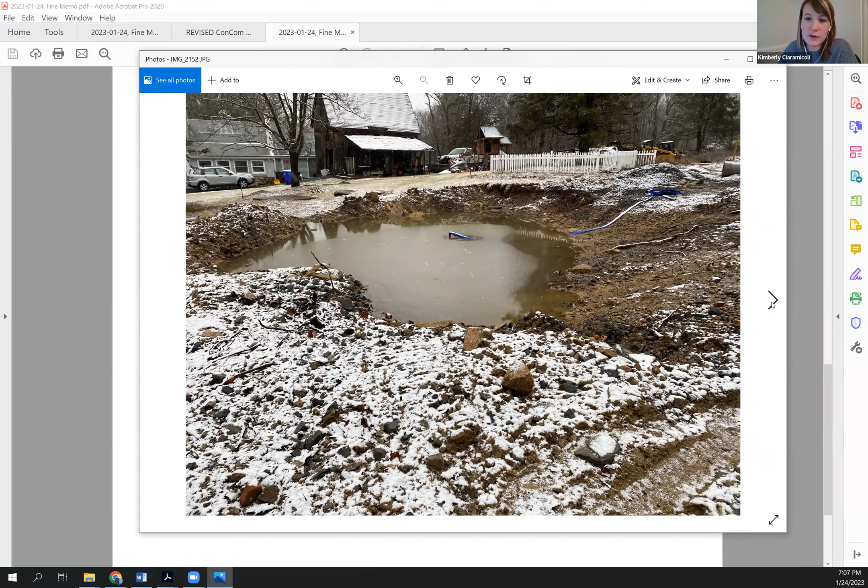This is, I believe, a 9-unit subdivision in the north part of town. I had gone out on December 29th, I believe it was, and they had a blowout in their erosion controls, and sedimentation had washed out into the riverfront to the Sudbury River and the adjacent BVW. Anna and I have been out a number of subsequent instances since that point. The developer, I believe, is on the line tonight, so he's taken a number of steps to control some of the runoff at the site, including rough grading the 2 main detention areas.

And these are some of the photos from the last time that Anna was out. So they've made a number of strides at the site with temporary BMPs, but there's still stormwater that's kind of actively flowing off of the site. The turbidity looks to be okay, you can kind of see it there. So we're making a lot of strides, but a lot of the site still remains unsecured, unstabilized.

And the commission, the last time we spoke, had decided to kind of table the conversation to see how the site did in the last storm, in the upcoming storm. And I would report that it mostly held, but I would love to see additional work. I think it's an ongoing process. Right, okay, thank you, Kim.

Do we have the developer on site or on the call? Yep, I'm here, Shane Perrault from Turkey Ridge Estates. How are you doing, Mr. Perrault? Good, how are you doing? Good, thank you. Can you kind of give us an update as to where you are, what work's going to be conducted in the coming days, and where we are in regard to the installation of the permanent stormwater controls at the site?

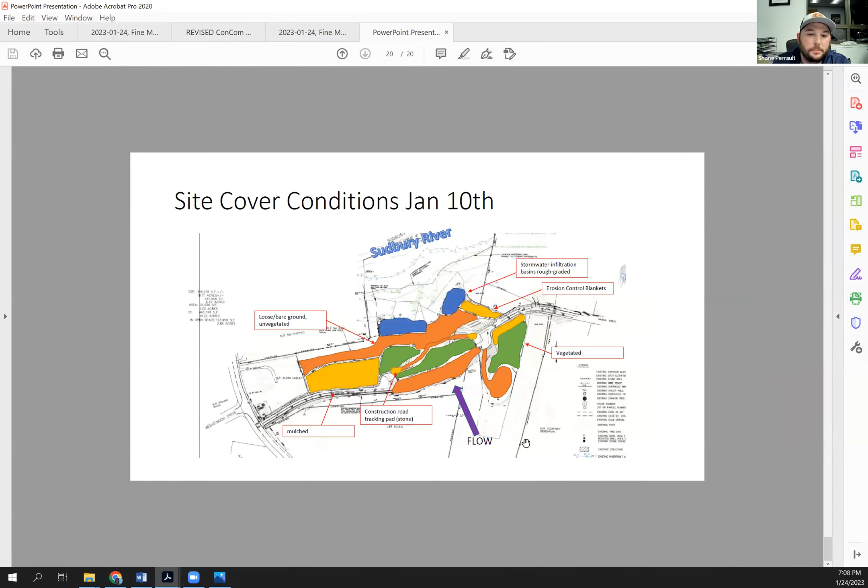Yep, so basically, since the last meeting, and since the breach, we've made it pretty much our sole plan to make sure that doesn't happen again. We went over in the last meeting all the different measures we made at the site, for soil stabilization and erosion control management in the 6 days that we had from the breach.

Since the last couple of weeks, since our meeting 2 weeks ago, we've continued basically trying to manage all the water that's there and prep for pond construction. I know Kim had some issues with some of the roads being unstabilized throughout the construction site. We had riprap delivered, and we installed riprap stone all throughout those construction areas so we could minimize any water runoff or tracking of mud up and down the hill.

We edited the holding basin that we had. We created some emergency spillways in case those got too full, so water could be mitigated and spill into other holding areas. We created more riprap, basically check dams uphill, and we've constantly been working as much as we can to mitigate that water.

And we've implemented, as we discussed last meeting, an internal inspection program. We walk the site along the erosion control line every day, in the morning and in the afternoon. We've been monitoring the weather, and since two weeks ago, it's rained or snowed about 12 of the 14 days.

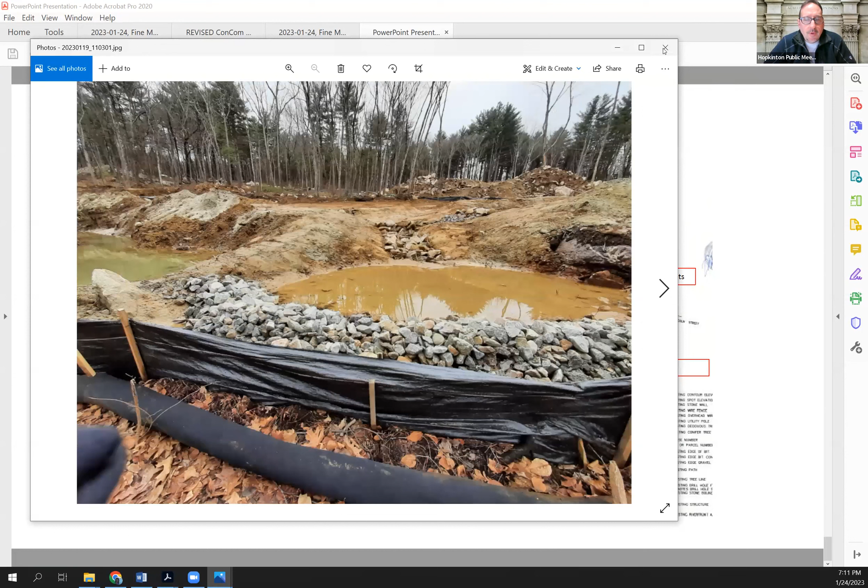Okay, what's the schedule on the permanent basins? When are those going to be started? How long do you anticipate it taking?

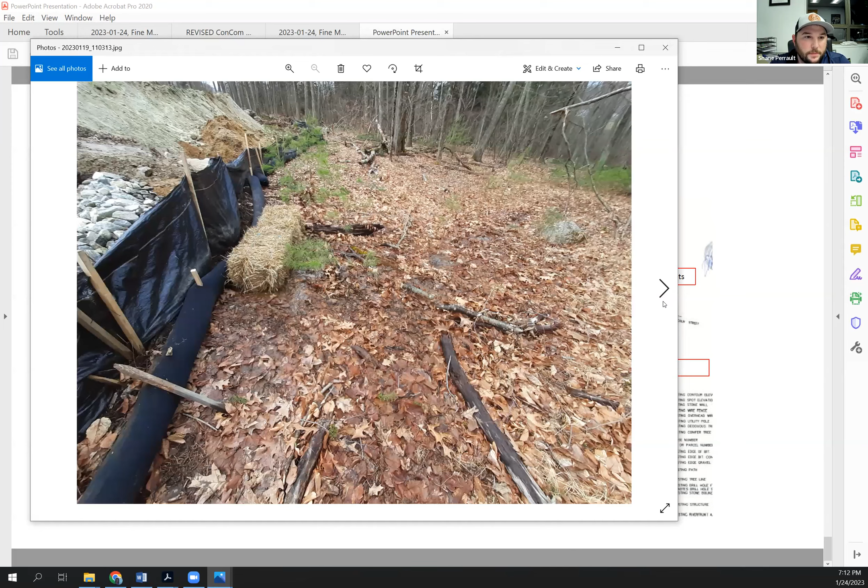Over the last couple of weeks, we started bringing in some material, fill material for the sub base, but we had to build a road to get in and out of the subdivision and the pond area so that we wouldn't track mud up and down, and also to help mitigate some of the water runoff and slow and clean the water almost as a check dam.

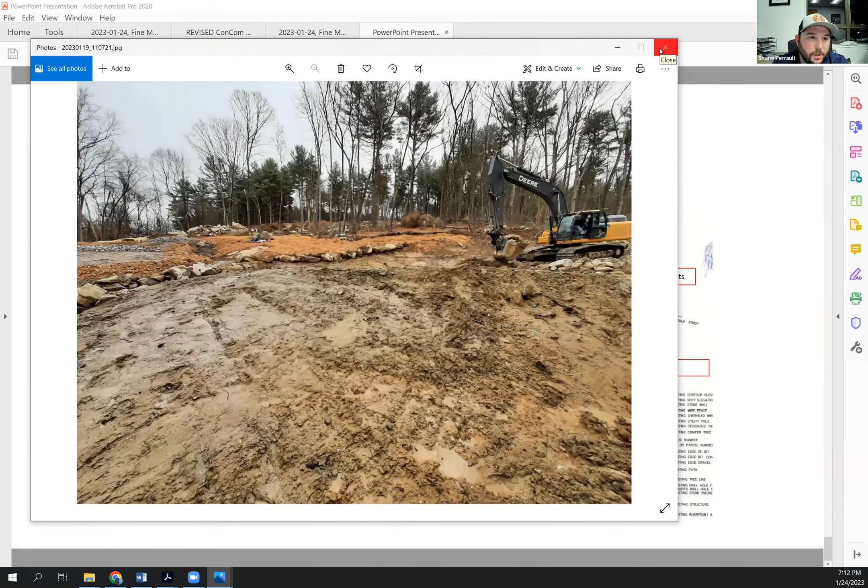So we've been starting to basically fill the ponds to sub base, and we have retaining walls along the backside. On Monday, we have our retaining wall contractor coming back to start all the retaining walls on the backside. Today and throughout the rest of the week, we're prepping all those areas so we can construct those retaining walls, which will essentially hold up the back ends of the basins. I'm sure you've seen the plans, but basically the back of the basins are right up against the erosion control barrier, so those walls are actually what's supporting it. So again, we're starting that on Monday.

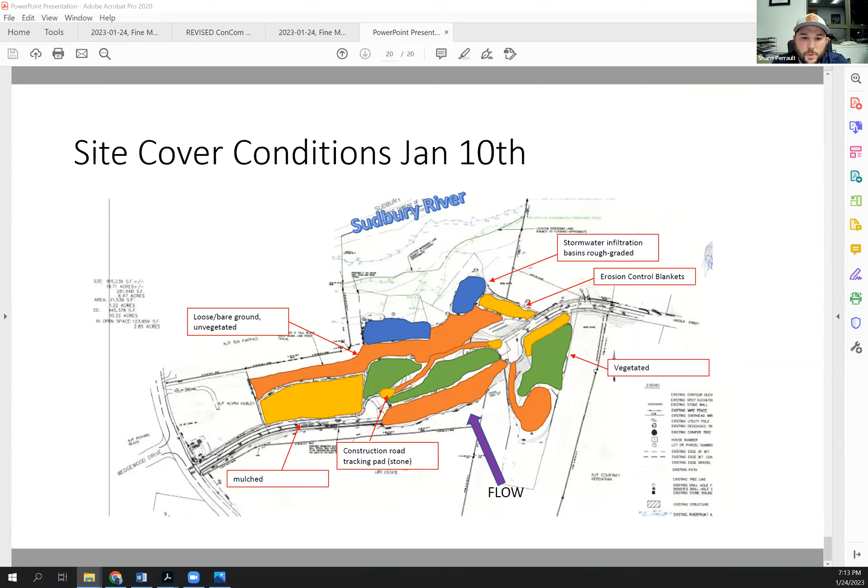Until then, we're doing all the prep work. When we talked about it a couple weeks ago, we figured four to six weeks, and we're still on that timeline. We might have lost a week with the weather over the last couple of weeks, but within the next four to six weeks we should have this whole thing built and ready to go. Our plan is to, once the weather breaks in the spring, roll into house construction. So our schedule is pretty imminent that we're going to have this full infrastructure built by the middle of March for sure.

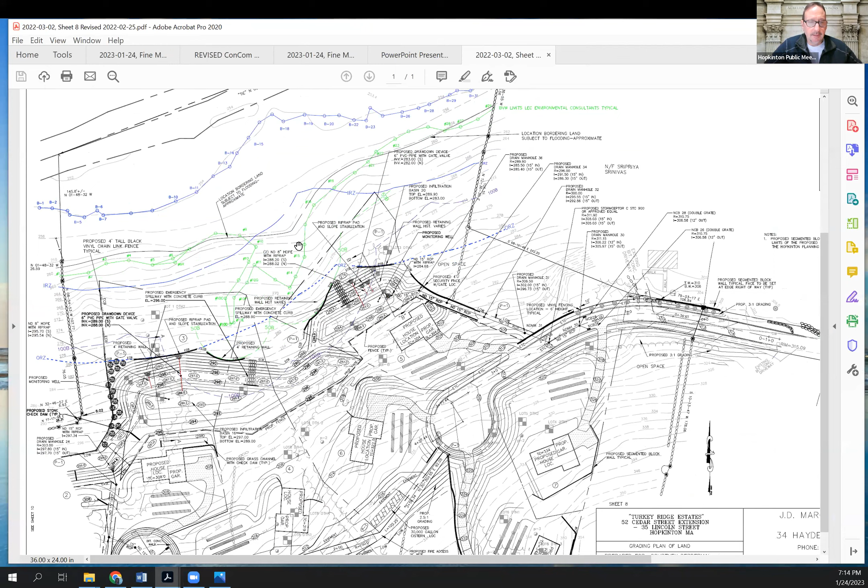Okay, yeah, so to Kim's point, the temporary basins that are there appear to be almost at capacity, 70 or 80% in the photos. We had rain the past couple days, we have more rain on the way tomorrow and into Thursday, and then we have spring coming, which typically brings a lot of rain as well.

So I understand that the water coming off the site now is clear, which is a good thing. There shouldn't be any water running off the site at all, but the fact that it's clear is good. So just keep in mind, as you're planning the schedule, that we anticipate there's going to be more rain, and we just don't want to see any more issues at the site.

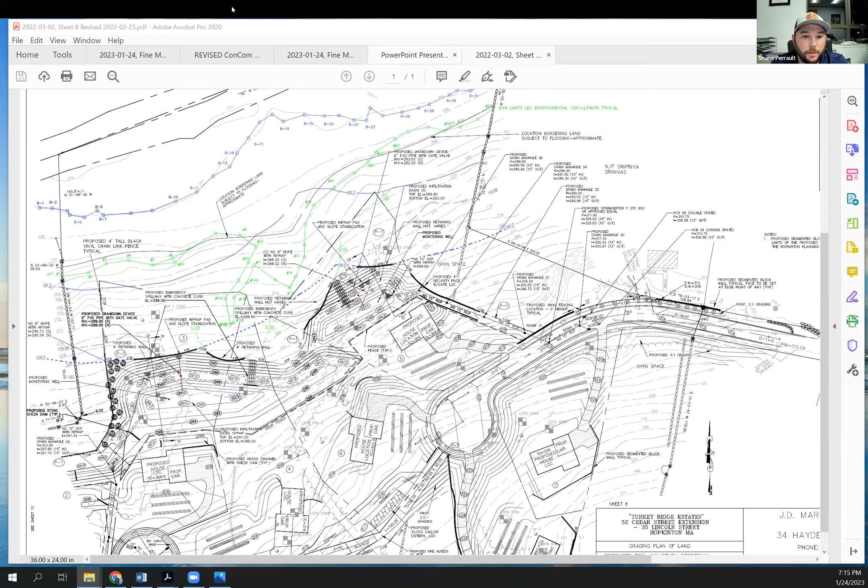Shane, I was just wondering, you had stated that Goddard was going to prepare a restoration plan for the impacted area. I was just wondering when we can anticipate that. Yep, I forgot to mention that we also want to do every measure we can here.

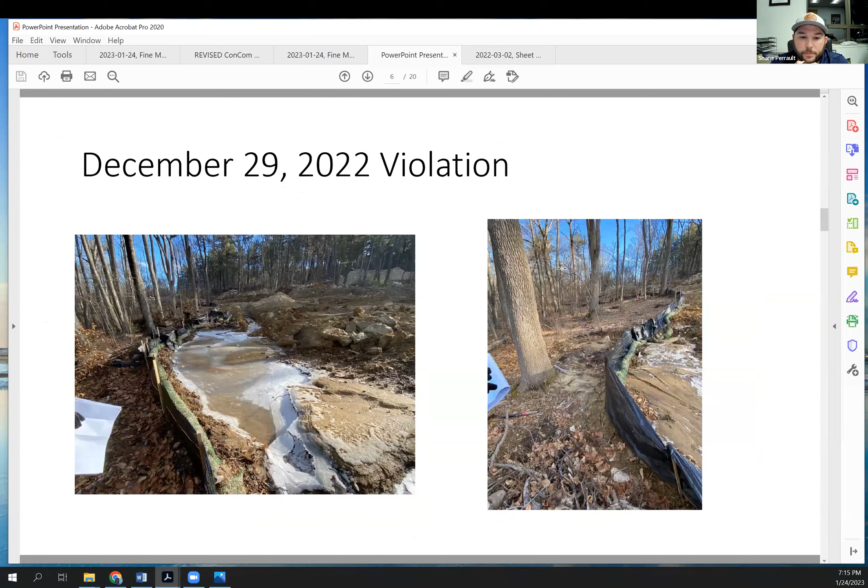We hired Goddard to be our consultant for the construction and maintenance of the erosion controls, and they're also preparing a mitigation plan and will be doing monitoring of the removal. Andrew, I believe, is on the call. Andrew, do you want to fill them in on where we stand? I know the snow hasn't helped us with the monitoring the last couple weeks, but give them an update?

Yeah, absolutely, happy to jump on. I had called into the last meeting as well, once we were brought onto the project to start talking about this. As of now, Goddard is officially on the project. We are moving forward now.

So that plan is coming. I will have that done within a week maximum. I plan to get that to Kim prior to the next meeting so she can review, comment, and we can approve something to get this moving.

So up next for Goddard, we were going to be visiting the site at the beginning of this week, but the snow pushed us back. We plan to go out there and measure the depths of the sediment plumes to provide an area-specific removal plan.

Typically for these areas, it's done by hand only, and we assess based on the depth of the sediment whether removing just the thinnest layer would be beneficial. As far as disturbance, anything we deem a quarter of an inch or more has to be removed due to the impacts it could cause to revegetation of the ground cover in the spring.

So the way Goddard's looking at this now, the area appears to be stabilized. We know where the plume is. As soon as the area is exposed enough for us to get out there and measure, we're going to have a plan specific to that area.

So in our opinion, I think everything is under control. The applicants are making a lot of strides on the site and continuing to do so, and we're right there with them. I saw the fines that were drafted up today, and I would ask the commission to consider the progress that has been made so far, with the understanding that the plan will be coming within a week to review.

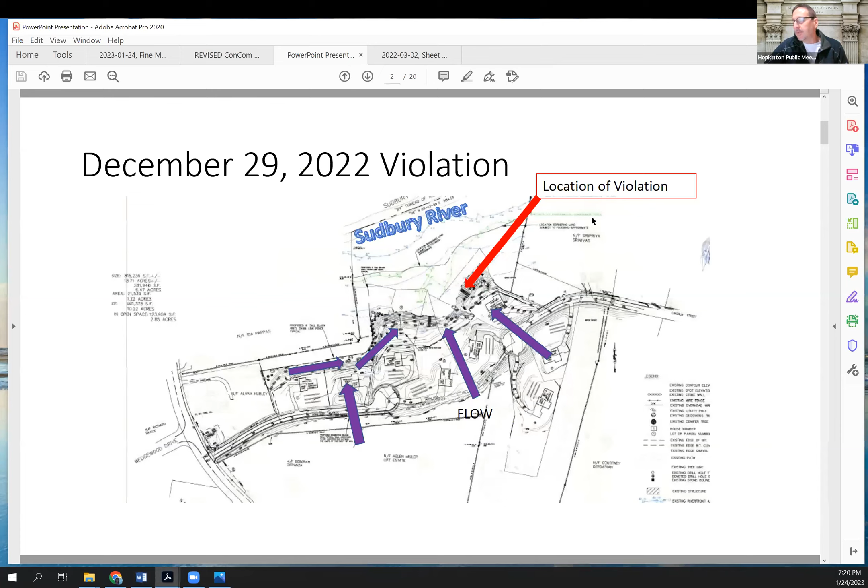This is an RDA, request for determination of applicability for a septic system at 4 Curtis Road. The Hopkinton Conservation Commission will hold a public hearing on Tuesday, January 24th, 2023 at 7:00 PM virtually online to hear all persons interested in the request for determination of applicability filed by Edward Daly to construct a replacement septic system with associated site work. The location is 4 Curtis Road, Assessors Map U13, Block 35, Lot 0.

Okay, do we have someone on the line for the applicant? Dan McIntyre, representing Ed Daly. Good evening, Mr. McIntyre. Good evening.

Mr. Daly is in the process of readying his home for sale, and he needed to replace his septic system. We were retained to design a new one.

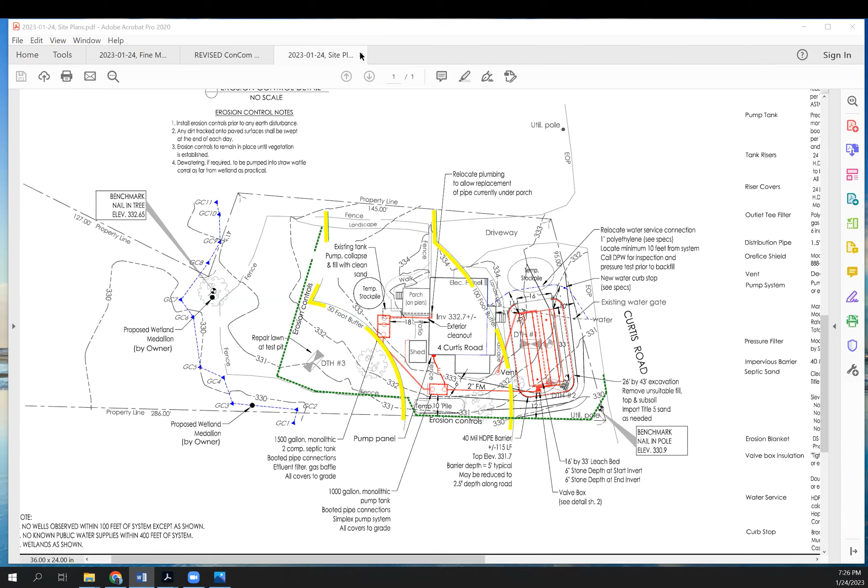Okay, moving along to continued hearing, 7 Whalen Road. This is a continuation of a notice of intent, and it's Mr. Prasad.

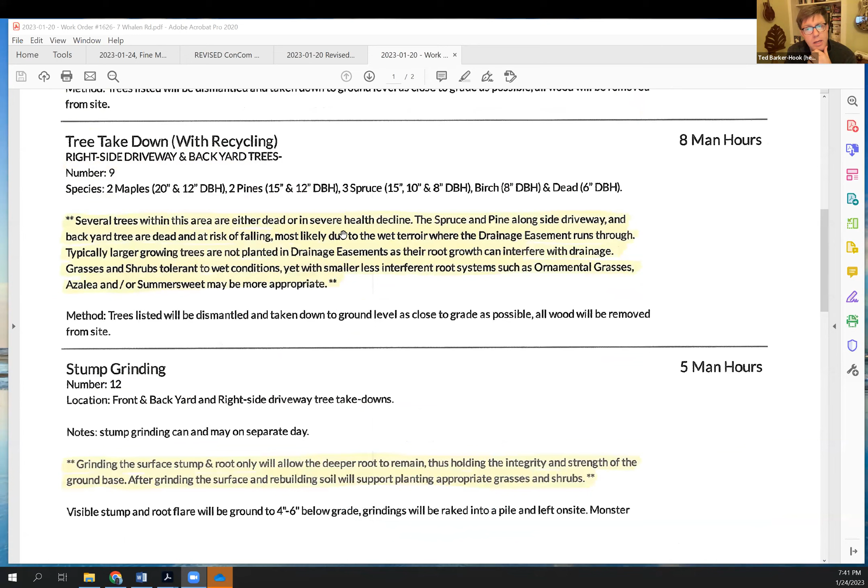Okay, I think, Chair, sorry Kim, to interrupt, did you have something else? No, I had a quick question for Kim. Is it typical that our arborist's opinion is the same as the person who then profits by cutting down trees? No, I'm not aware of an arborist in town. Excuse me, I'm not aware of a tree company in town that has an on-staff arborist at this point.

This is an issue that's come up on a different site that we're going to see in a few weeks. So if this service does have an arborist, it will be the first one I'm aware of. But it strikes me as a conflict of interest to provide honest assessments of tree health if you make more money if you can say this tree is not healthy and needs to come down. Yeah, I mean, they do have their certification that they're required to keep up with, and they certify a certain ethics code.

I'm not sure if there's anything else we can do, how far we can go, you know what I mean. We typically don't accept just quotes, if that does make you feel any better. I think the one thing I'm just seeing here, the numbers, it says several trees are either dead, but I don't see a number or specifically which trees, which I think is important if we're applying our typical healthy tree gets replanted standard.

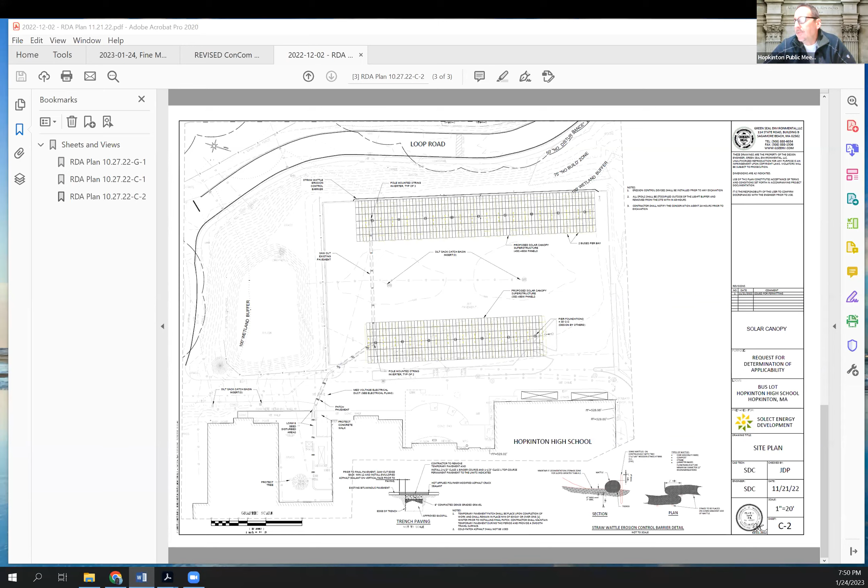Moving right along, we're making good progress. Mass laborers training - there are three hearings: the notice of intent continued for the pond, the notice of intent continued for the Clinton Street right of way, and the notice of intent for the gas line - actually there's four hearings, excuse me - and then there's a notice of intent for the fire suppression line. Do we have the applicant on the call? Good evening, Mr. Connors. Good evening. You want to give us an overview of where we are today? Sure, can I share screen? Yes, you may.

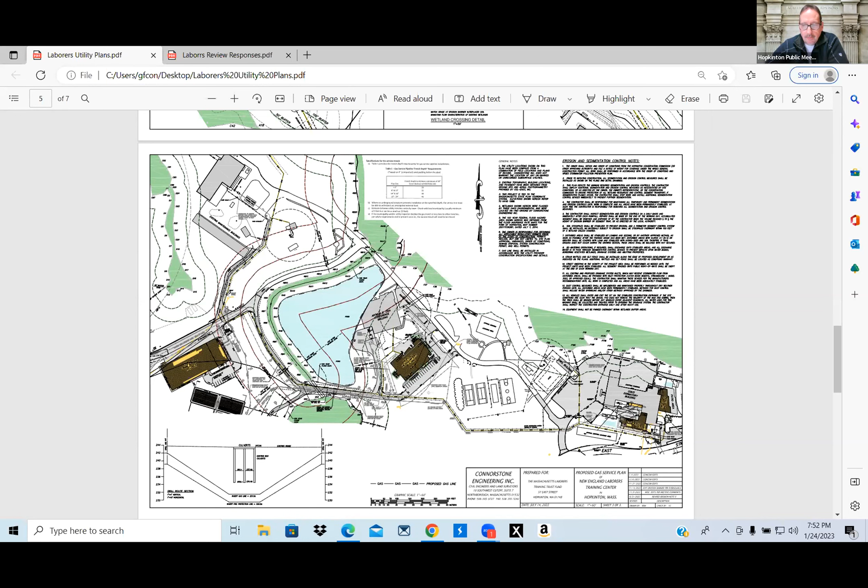Where am I? I'm trying to find it. All right, I'd like to start. I'm not able to move that. You hear me? Yeah, you should have control over it. Not able to move it. I think that's an issue on your end, Mr. Connors. Hey, mouse is moving. Point oh, up, here we go. I gotta move this, and put that. All right.

Getting into the campus proper, which is what I call where the buildings are currently being built—areas that have been disturbed, or are currently part of the campus and not natural wooded areas—I call that the campus proper. Then we have an area from the Maloney building, up on the hill, going back through this rear section of the property, which is the undeveloped portion of the property.

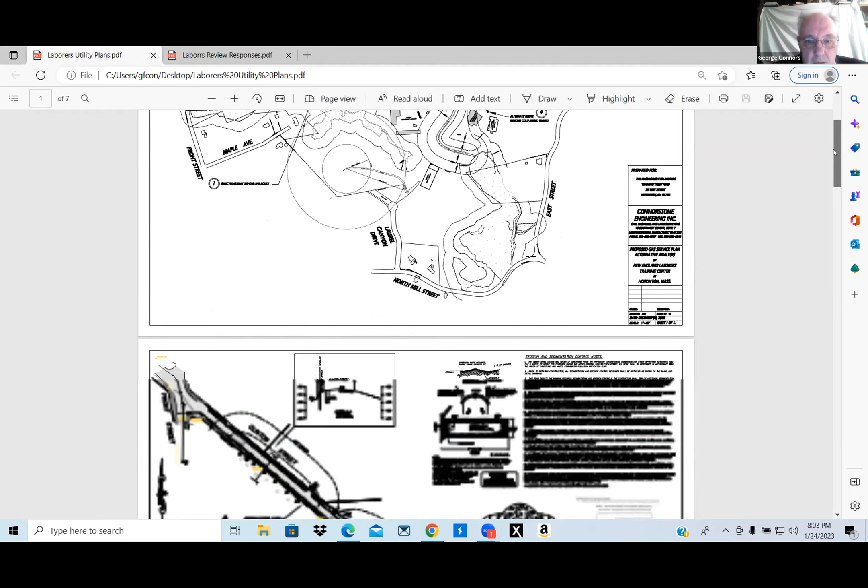I'd like to go to some other drawings now, but I want to stay on this for one more minute. Your first listed hearing is a pond over here that we talked about dredging. We filed a notice of intent for that about 1.5 years ago and we've been holding that in abeyance. The fire department required us to dredge that as an additional source of water.

It was a fire pond, had been a fire pond for many years. It's not very deep, kind of poor water quality, geese and things there. We've demonstrated that there are fish in it, it's not a vernal pool. We've done soils analysis and depth analysis this past winter, a year ago, and determined that its volume is very, very small. It's probably not the best thing to pursue that notice of intent for dredging that pond, leaving it as it is.

We had a driveway coming in with the various draft lines for it a long time ago. This particular pond down here has been used as a fire pond and has draft lines on this end. So what we looked at, it's got millions of gallons of water, 15 feet deep in the middle. I've provided you with that mapping of the bottom of it. The fire department, we've talked with them and their fire consultant, to determine that this would be a much better source of water. It's very clean, clear water. It's been there for about 20, 30 years.

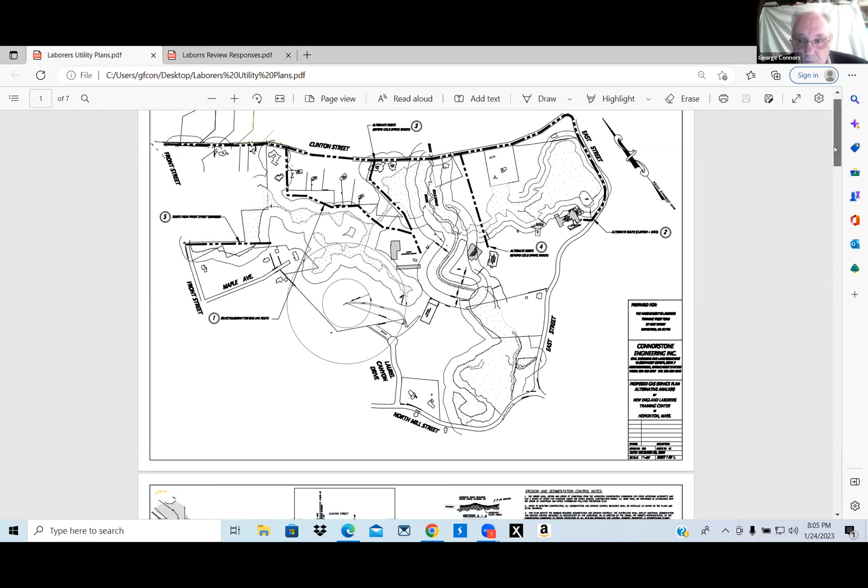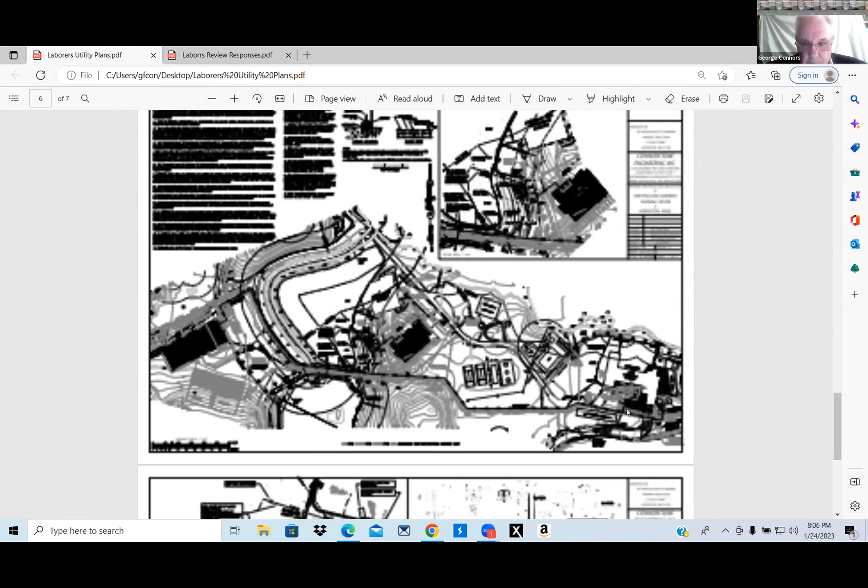I'd like to go to that diagram of the pond while we're on it. Is that refreshing? All right, there we go. Yeah, nice.

All right, so this is the new headquarters. Here's the new headquarters building, which you approved not too long ago. It's under construction, that's the Coia building at the pond. This is our pond, it's the deepest portion right there. We have a paved driveway apron that comes in here. There's been a generator in this location for years.

Our underground storage for oil for the fire. In this particular location we've chosen that for our new fire pump that would service the entire campus and East Street. We'll get to the drawing for that in a minute, but what I wanted to show you is these are our traveled ways that come around the site. This was our culvert, a double box culvert that we penetrated underneath with horizontal directional drilling. So that gas line and the water line, which will be in another drawing, will be in the same particular location. Again, it was fairly easy to accomplish at that time.

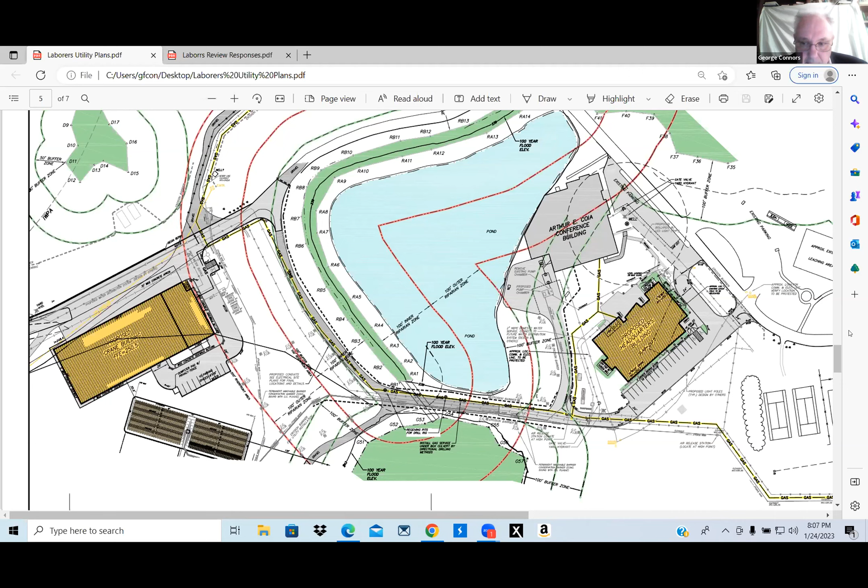Onto that actual pump station. So the fire suppression line will basically be co-located in the same trench area as the gas line in the campus proper area. Is that correct, Mr. Connors? That's correct, and there are 4 other pipelines under that culvert. One for electricity, one for telephone, one for our sewer system, which connects all the buildings into one particular location, and one for our new potable water supply for the entire campus.

So again, the Coia building, the pond is here. This is about a 20 by 30 foot pad with a small little building on top of it. It will have a very deep wet well into the ground where the pipe will enter into the pond in this particular location. And it will be a draft line that will be able to be operated automatically if a fire system requires it in the buildings.

Additionally, it will be available to pump water into the water line that goes out to the edge of East Street. It will also have, as another opportunity, a draft line coming in here from the edge in case the fire department simply wants to charge this line from their own pumper truck. Maybe there's a power failure, maybe something that doesn't operate there, so this is simply a backup that they want.

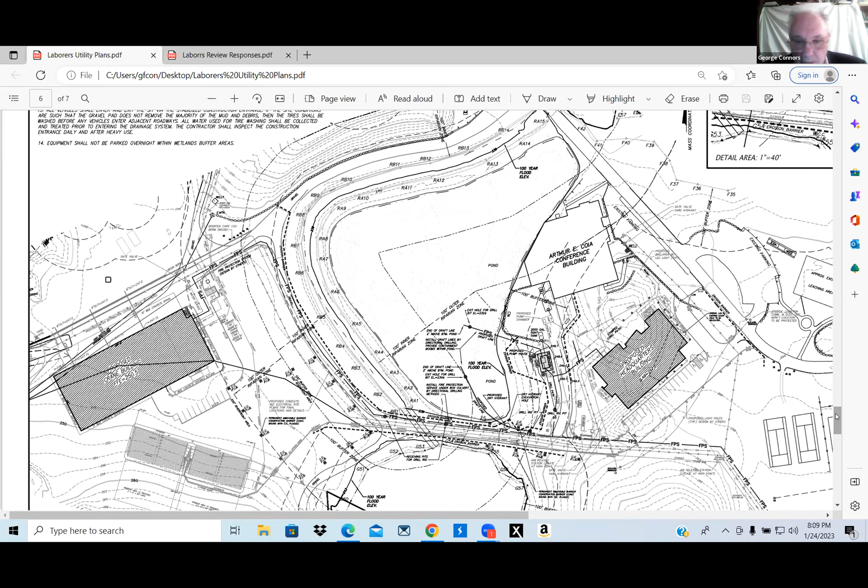In terms of the work in the campus proper, I think you've seen, actually Ted, I think Ted and I were the ones that walked the site back a year or so ago. All this work takes place in the campus proper, as I call it, in areas that have previously been disturbed. So that leaves us back to our gas line coming through the woods. As you know, there's one section that comes down Clinton Street. That starts at Front.

I'm going to reduce that. As Clinton Street, we have Front Street just up at the top of the plan.

But as we come down Clinton Street, we have a little bit of a wetland complex that's right along the edge of the street, and we have another one right along the edge of the street as well. And we get into where we go into the property.

Continuing here, this is where we go into the property—those little open depressions that were, I think, formerly houses or some kind of construction at the time, torn down. The laborers have acquired that property.

We've given you diagrams of the pipeline depth, which is about at the elevation of the water, the top of the wetlands at that location. And this particular section of road is almost dead level at elevation 202.

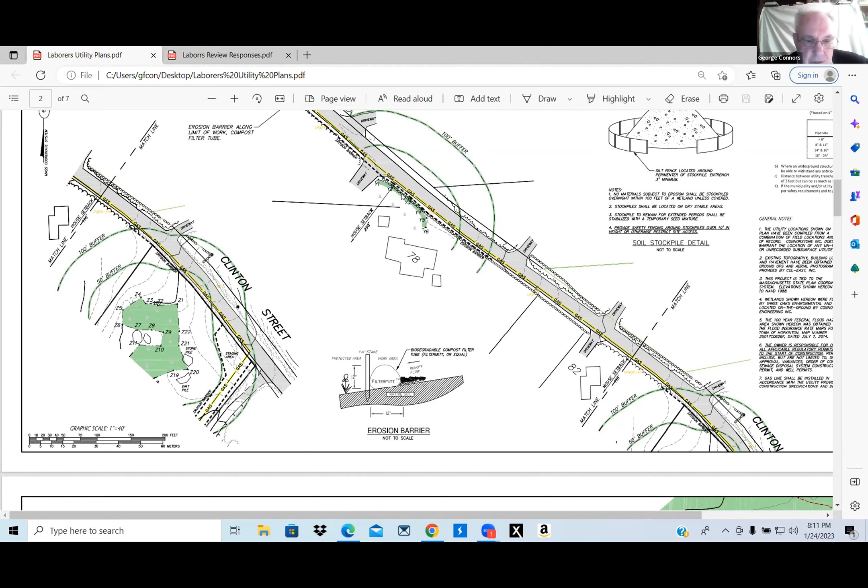We don't anticipate any dewatering of these little wetland complexes. We gave you some diagrams of the water line or the gas line as it comes into the property, past these two little depressions—I told you, some sort of houses or something like that at the time. That pipeline comes in along there.

It is well above the low portions of these. I don't think they hold water for a long enough period of time in the springtime. Nevertheless, we are above that.

And then we start talking about this particular gas pipeline that goes through the property. We made a little bit of a change in this location to bring it out further away from the corner. And then we come along here—you can see in green, these are the wetland complexes.

And then there's the 50 and 100-foot buffer. The majority of our work is in the 50 to 100-foot buffer as we come along, not really in the wetland complex at all, until we get down to this particular location at the bottom—I call it a ravine, a fairly small little area of wetland crossing.

It's an ephemeral ditch that comes through here. It does flow when it's heavy rain. I was out there not too long ago and it was dry. We think that's a kind of minimal crossing. We're happy to put a little swamp mat over it if that's a problem, but we believe that is the minimal impact we could have to an actual resource on the site.

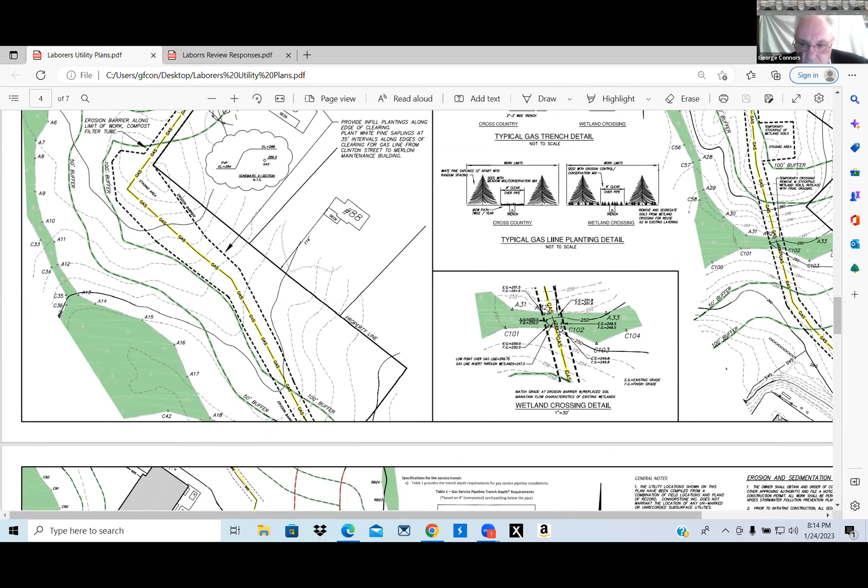This is a diagram of the actual gas line with various elevations. And as I said, that's the crossing, and that's the corner of the Merloni building there, which brings us into the campus proper—that shows up right here.

Now at this particular location, we're where they already have infrastructure and buildings and things of that nature. Right, that's all previously disturbed area.

So just so I'm clear—the continuation for the pond portion, 188-1741, we're tabling that particular filing pending the outcome of the other three, correct? Correct. Okay, all right, got it.

Okay, and then when was the habitat evaluation submitted? I think it was about 4 weeks ago.

Okay, and did that have the planting plan in it? It did—it had some small type, and Vito, yesterday I think, increased it in size. He increased it yesterday? Yeah, in response to a question or a comment.

It is, yes. That's kind of what I was thinking about, I just hadn't heard that specifically. I wanted to verify that. Whatever is campus proper, which is where the river comes through, is all disturbed, but also consisting of gravel or paved roads or drives.

Yes, if it's going through a gravel or paved drive, it would be able to be considered as an exempted activity. Correct. Although we've tabulated that in. Right. So then that was going to be another question as far as your tabulation, whether it includes all work within a riverfront area or only things that you feel are not exempted. Well, I feel that it's all exempted because of what we just talked about. Okay, I'm not sure I read your local code to say that.

It's a moot issue. I think that more or less covers my questions. All right, thank you, Joe.

Let me open it up to questions from commission members. Through the chair. Yes, George, could I have the screen back? Sure, please. Thank you. Good. Get it? Yep, we're working on it, but we should be able to get it. Thank you. Do you see it? Yes, okay, perfect.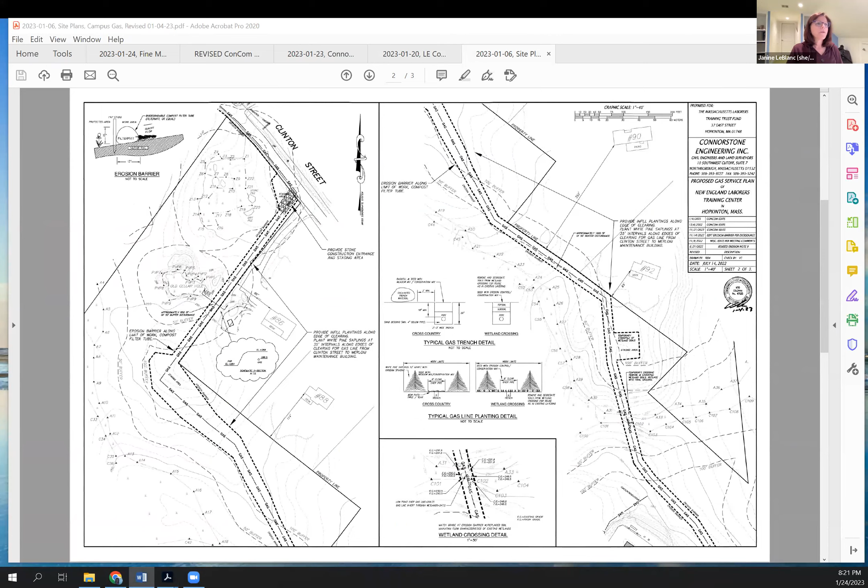So, questions, comments from commission members? Go ahead, Janine. Through the chair, regarding the alternatives analysis, my interpretation or reading of the alternatives analysis on alternate route 4: yes, it's a wider wetland crossing, but if you move over about half an inch to the left, the wetland crossing looks to be about half the width. And while it still is wider of a crossing than alternatives 1, the way I see it, it's a wider crossing in the campus proper that's already disturbed versus an undisturbed crossing in alternatives 1.

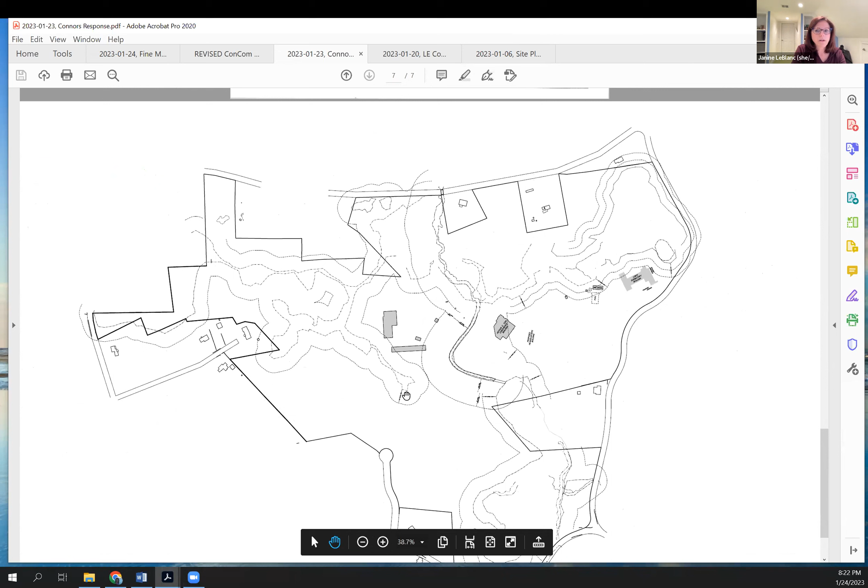Give me a second to look at it on my phone.

Okay, when we walked that site, there's actually a bit of an opening pathway along that line from Clinton Street in. Yeah, you follow that, like a cart path, Mr. Connors? Yeah, and it's pretty substantial. It's probably about 12 or 15 feet wide, and it brings you right to that particular location. And as the photographs that I gave you, which we took there, indicate, that area is where there would be literally no trees that would need to be cut across there.

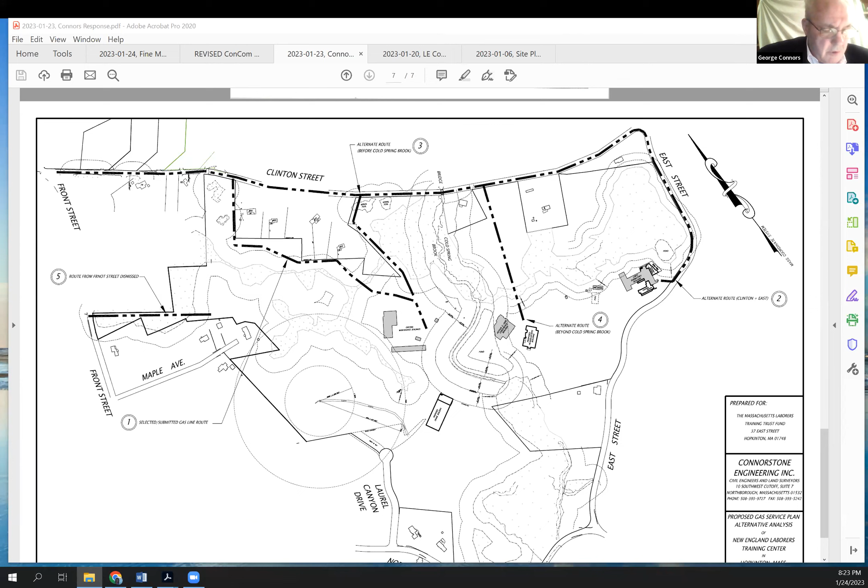Yeah, if you go a little bit to one side, then you do in fact have a little bit smaller of a crossing, but you're going to be doing a lot more ecological alterations. But is that considered sort of the campus proper that's already disturbed? No, not until you get to the other side of that wetland.

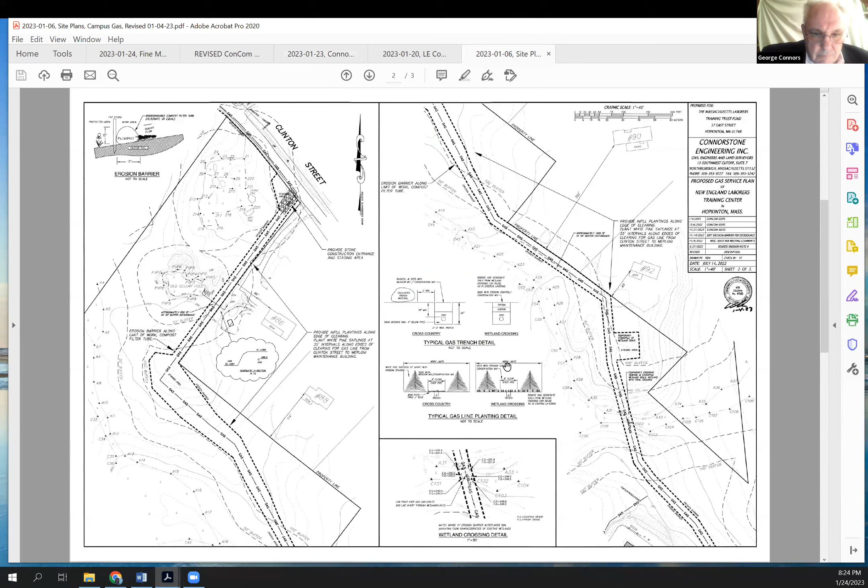Are you talking about this area, George? You see the headquarters building? Go right, start at the upper corner of that, and then simply go straight up the drawing. That's about where it is. There's a parking lot just across from there that you can see. You see the little island just opposite headquarters, and there's a parking lot behind that.

And then you see where the wetland line is, and then the first 50 feet. Somewhere between the 50 and the 100 is the edge of the parking lot. So that crossing is pretty close to pavement and buildings already, where it comes out to pavement and building.

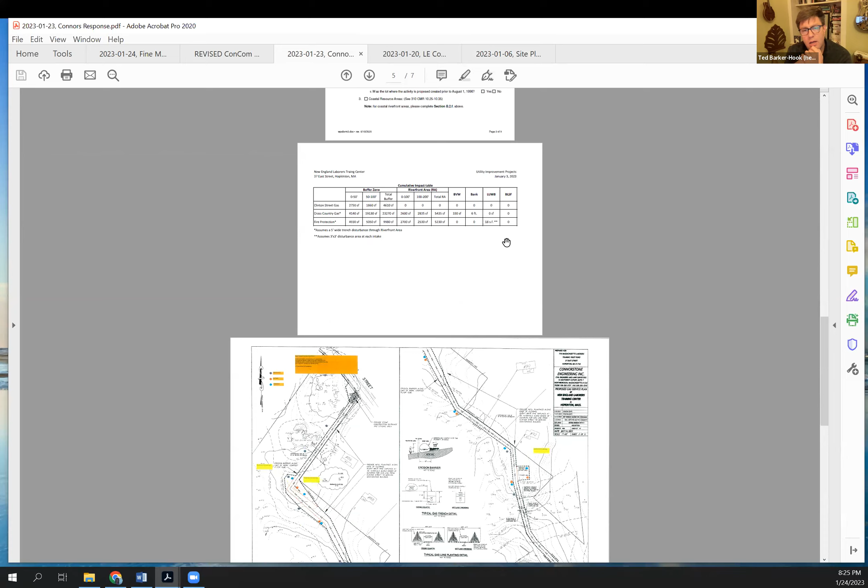Thank you. May I follow up on that same option 4, just so I have it clear? Are you saying, Mr. Connors, that there is a cart path of some kind from Clinton Street until you get to the water crossing? It's most of the way, about 2/3 of that way. So is that a route that has almost no tree removal? Oh, no, it's not quite wide enough. It's about 10 or 12 feet, so it's not quite wide enough.

Yeah, I had one other question before Janine asked hers, and I appreciated Janine's question. You mentioned if the pipe went all the way down Clinton, then down East, that there would be tree removal on East Street, and I think you used the word significant or something. Do you have a count roughly of how many trees would be removed along the edge of East Street? I think it was 9. There's an arborist report that was submitted. I think it identified either 9 or 11. I don't recall, it's about 2 months ago.

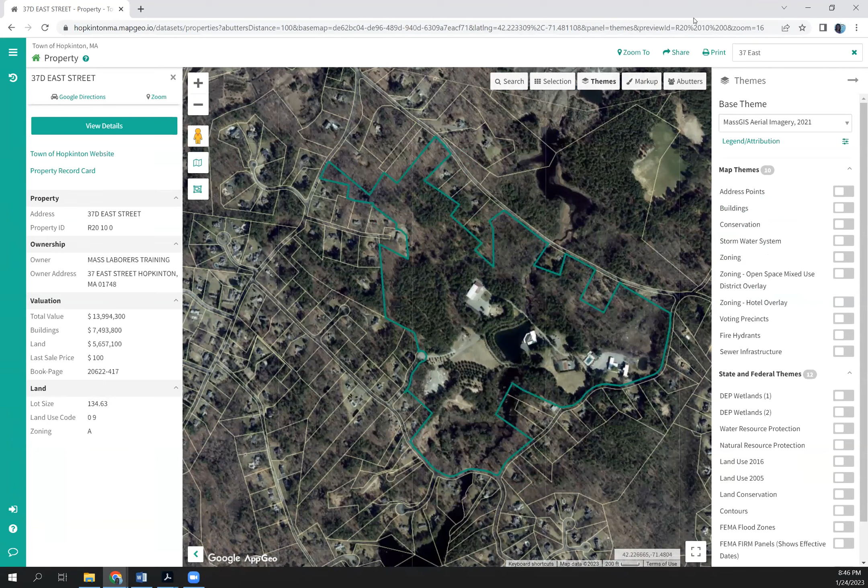Not a question, but a comment, since I didn't chime in before. I'm still very troubled by the proposed route. From a conservation standpoint, I think they should go up in the road to do this, not over there. I just can't justify it right now, because it would be minimal damage. The other thing, and this has nothing to do with conservation, but from maybe a political standpoint, I don't think natural gas will be banned, because I think wisdom will prevail and people will realize that electricity comes from burning natural gas to generate it.

But anyway, all right, thank you for the comment on the gas line. All right, thank you, Jim.

Through the chair, yes, Kim. I just wanted to add quickly into this discussion that I did receive an email from the fire department today, and they are endorsing the fire protection line portion of this project, just for the commission's information. Yes, thank you, Kim, for that.

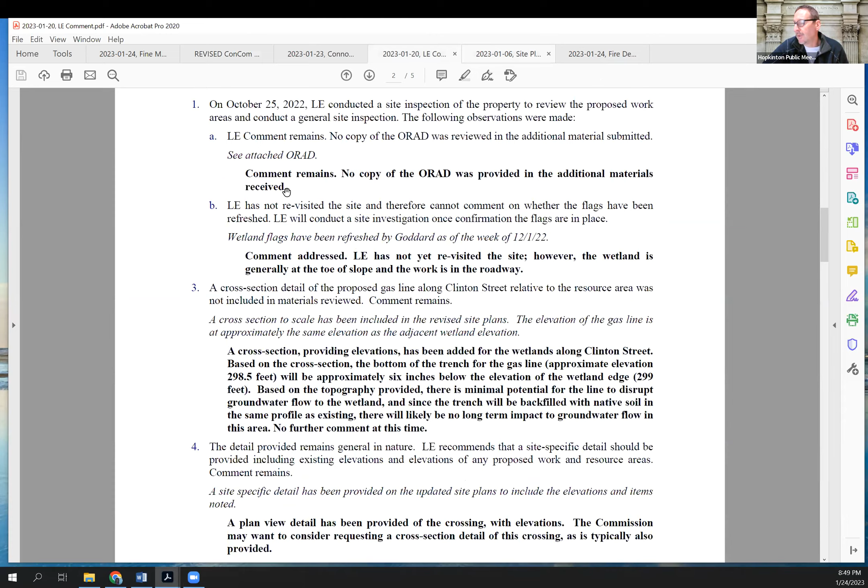Okay, so I think we have four, and Kim, I'm directing this toward you, and the other commission members, feel free to jump in. So we have four applications open right now on the agenda. As we previously indicated, the pond application 1741 is tabled based on the outcome of these other three. Then we have the Clinton Street right-of-way, which is basically installation of the gas line along Clinton Street to the currently proposed ingress, and that's it. So that covers the installation of the gas line up to the ingress in the roadway. It appears that the impacts to resource areas related to that particular filing are nominal.

So my sense is we could probably vote on that one tonight. And the other one I think we can vote on is the campus proper fire suppression line. Again, there are nominal impacts to resource areas related to that one, and it's all in previously disturbed area, which leaves us with the gas line alternatives that I think we still need to address.

I think for that one, it needs to be continued. There was a new planting plan submitted that we need to go through. I didn't realize the habitat evaluation had been submitted, I didn't see that, so I'd like to go through that. But Kim, I guess my point is, are you comfortable voting on the two: the Clinton Street install, 1794, and the fire suppression line installation in the campus proper area, which is 1798?

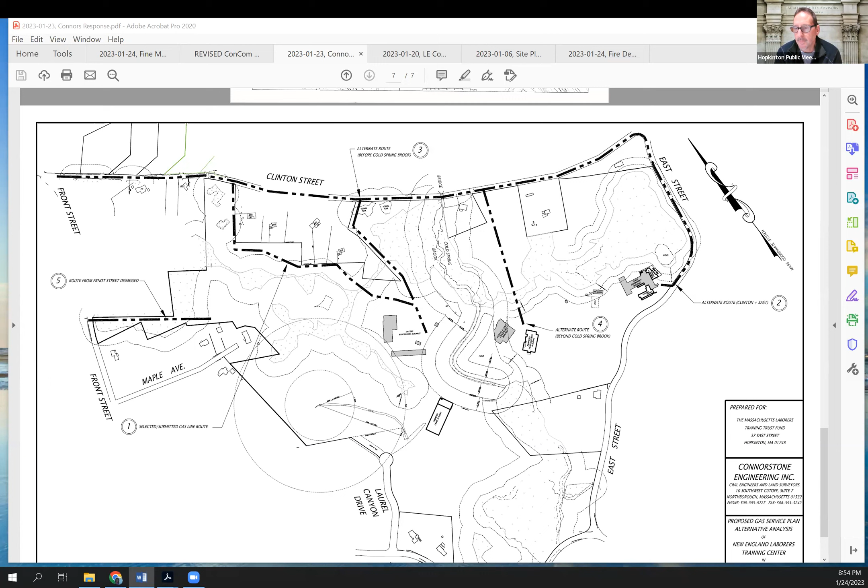Janine, yes I am. All right, Ed.

So we're voting on the gas line to the potential point that it leaves Clinton Street into laborers training, and the fire suppression line, correct. So my question would be, if they build to that point where the little red line is now, and then the decision is made that they have to continue down Clinton Street because of whatever, is there any impact by having it stop there at that point? Not that I see. Yeah, I don't think so either, Ed. As long as the pipe is going to stay the same size, they can truncate it there, and it gives the option of continuing it down Clinton Street to alternative 3, or continuing it down Clinton to East Street and coming in on the campus at a location further down East Street. So it's not going to hamper any future decision on the other alternatives for the gas line.

Okay, so we'll bifurcate the vote, voting under the act and the bylaw for both of these applications. I'll start off with the Clinton Street Road right of way. If I can get a motion to close and approve the notice of intent as discussed under the Wetlands Protection Act. This is Ted, I'll make that motion. And a second please. Second, Janine. And I'll do the roll call vote. Melissa, aye. Jim, aye. Ted is an aye. Ed, aye. Janine, aye. And I'm an aye.

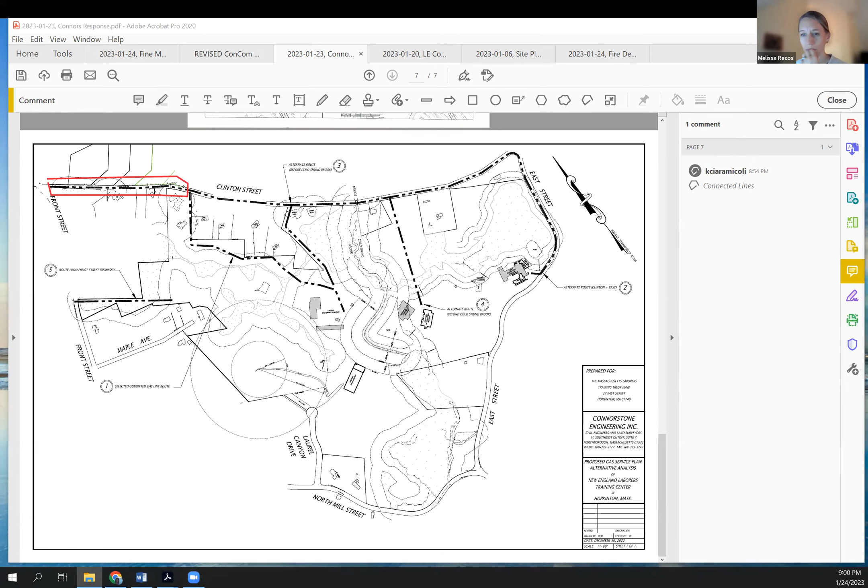Right, when I read your code, your regulations, it doesn't seem that you differentiate between, let's say, a pipeline going down an existing road and your 50 and 100-foot buffer. Is that the case, or is it not an impact?

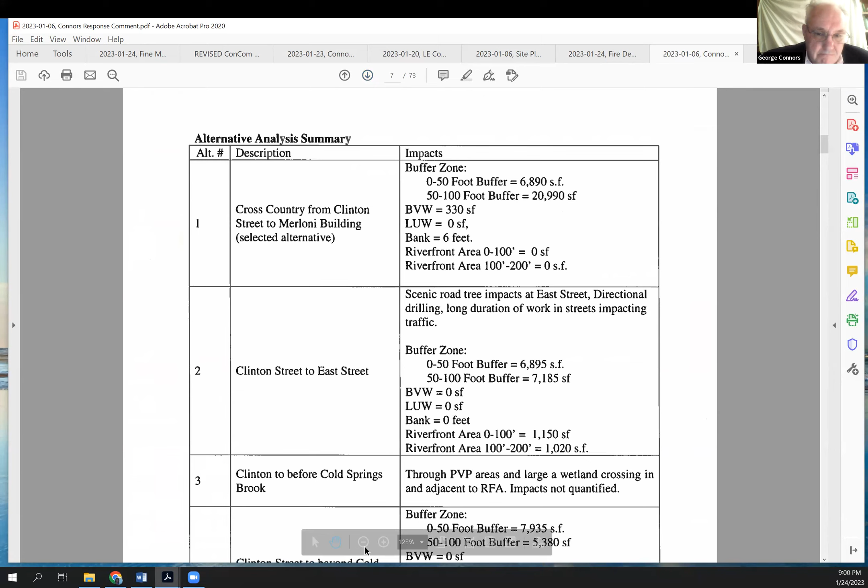Through the chair, yes, Kim, go ahead. Yeah, maybe I can help, Mr. Connors. I think, you know, the commission evaluates these things on a case-by-case basis. So having an understanding of which impacts in the buffer zone are undisturbed areas and which impacts in the buffer zone are disturbed, meaning pavement or lawn, would help them evaluate these alternatives kind of apples for apples.

Okay, I got it. Yeah, because the way it's outlined here is, it's just, you know, impact to the buffer zone, BVW, bank, riverfront, and it's not identifying which of those impacts are previously disturbed. It's just, you know, blanket disturbance. Initially we had that differentiated, but I understand what you want now, and I'm glad it's in the record.

Through the chair, yes Kim. While we're on this topic, I also wanted to ask Mr. Connors, in looking at this chart, the preferred alternative is shown with no impact to riverfront area, but the Clinton Street alternative is shown with riverfront area impacts, but both of those alternatives cross Cold Spring Brook in paved areas. So I was just wondering why the difference in the riverfront area impacts there.

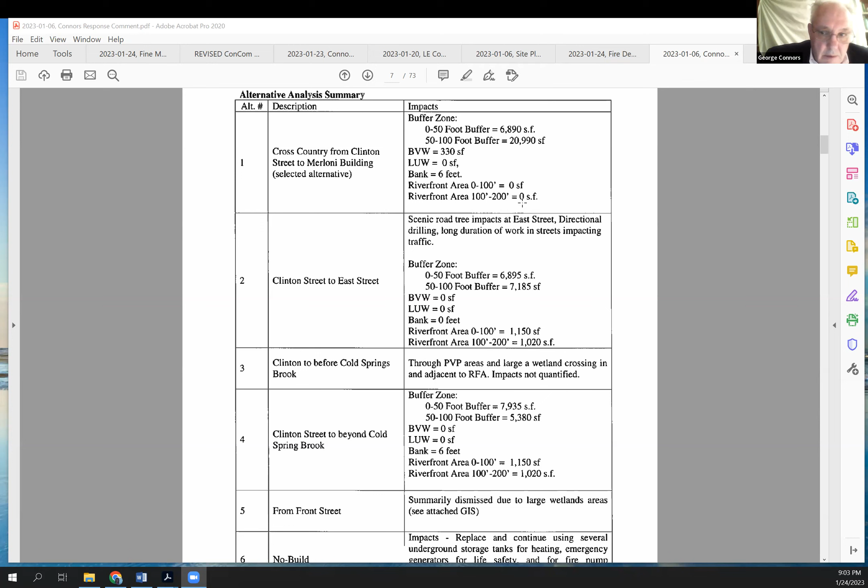So for a complete project, I would recommend that in any future analysis, the entire project's impact be evaluated. We did it for that... I understand what you want now.

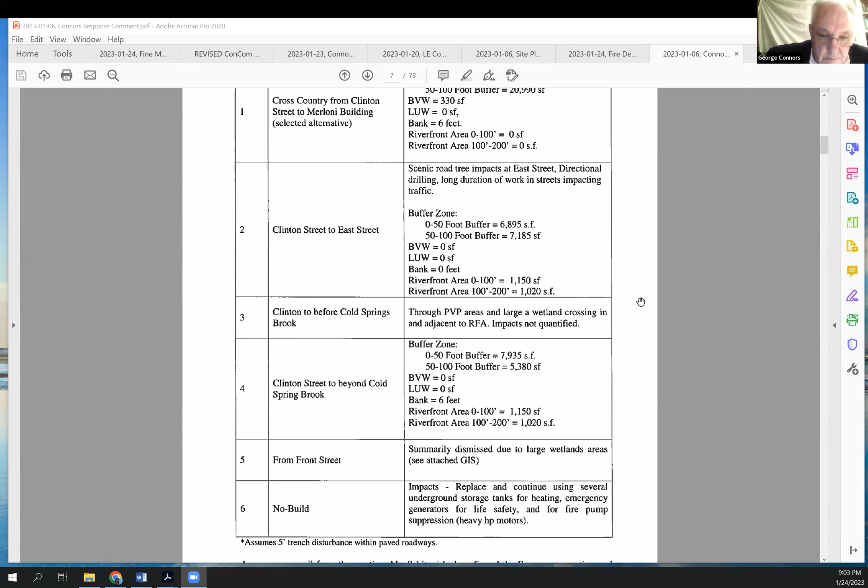Understand, okay. Yeah, so got it, okay. When are you continuing to? When would you like us? Our next meeting is the 7th and the following is the 28th of February.

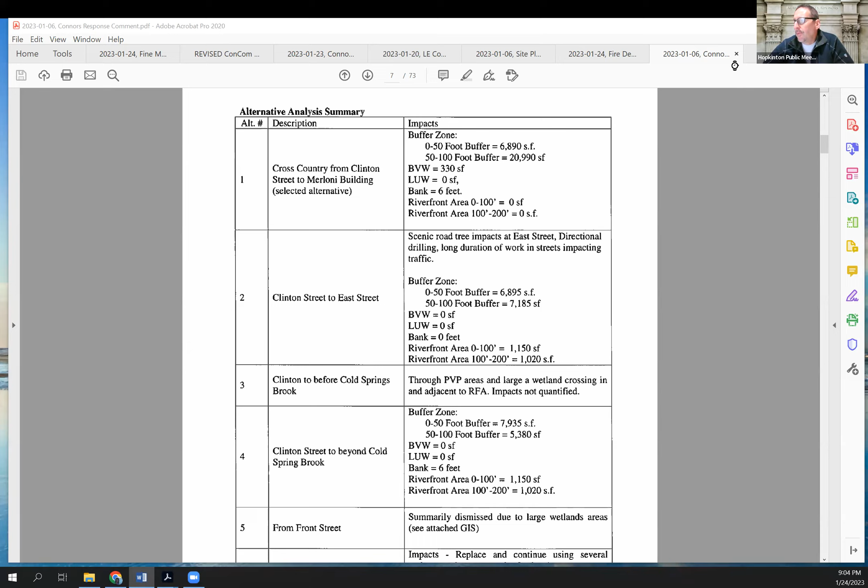Jeff, I can speak to this. Sure, that'd be great. Thank you, Kim. Let me just pull up the as-built.

Okay, just noting that I'm here. This is Georgia. Hi, Kim. Hi, Georgia. Thank you. Good evening, Mrs. Hall.

Mrs. Hall had joined us at the last meeting with a request for a determination of applicability for an addition at this site. At that time, Anna had realized that there was no certificate of compliance for the original construction of the building.

So this is an oldie. It's a single family home. There's a wetland kind of in the southern boundary down here. So the 50-foot buffer is right about here, and the 100-foot is here.

Lucas went out and found some minor comments. I can pull them up. There is an unpermitted deck in the 50-foot no-build zone. It is on existing lawn. We are not sure when it was constructed.

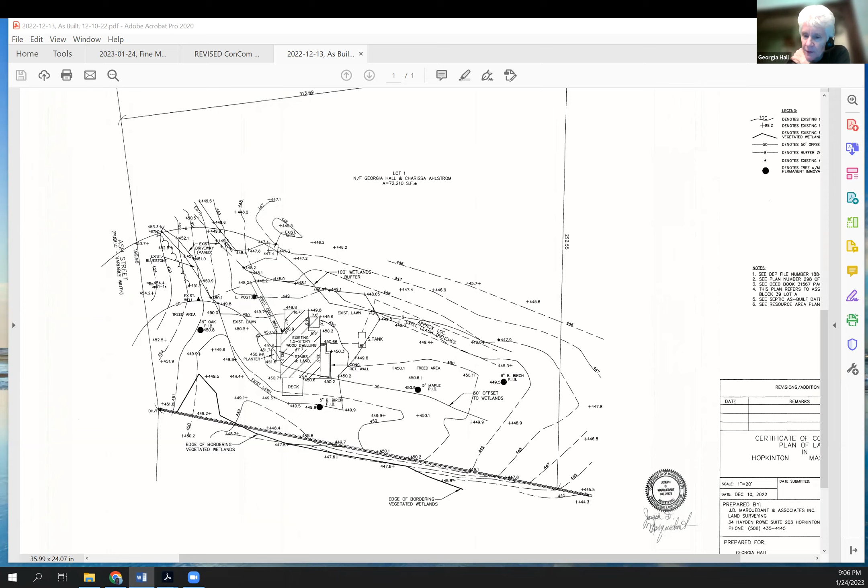Okay, so that's all I had. All right, and then there were some minor deviations on locations or distances from structures to the wetland - we're talking feet, in most of the cases just a few feet. All those are depicted accurately on the as-built.

Joe, Kim? Yes, they appeared to be accurate from my observations. Okay.

All right, so Kim, are you comfortable with going ahead and voting on this certificate of compliance for this project in the current condition? Yep, I am. All right, if I can get a motion to approve the COC for 117 Ash Street.

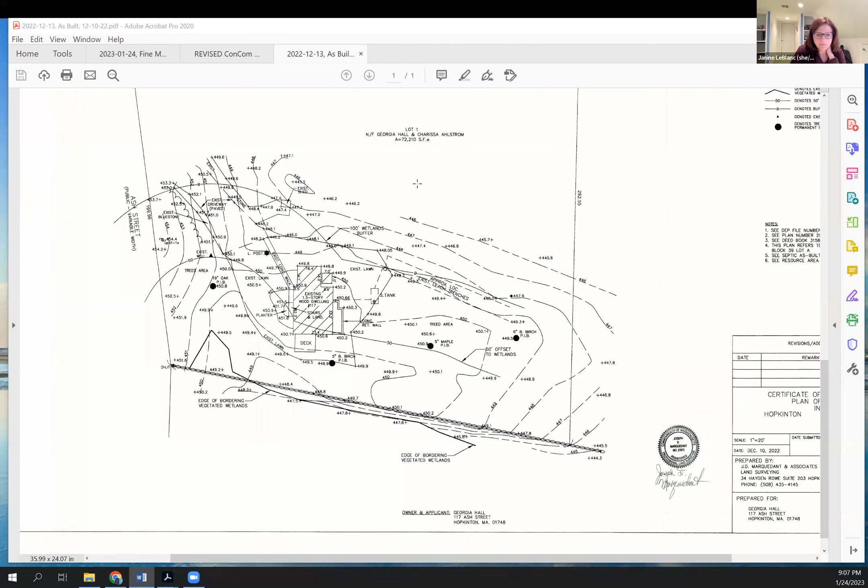Ted will make that motion, and a second - second, Janine. We'll do the roll call. Melissa, aye. Jim, aye. Ted, aye. Ed, aye. Janine, aye. And I'm an aye.

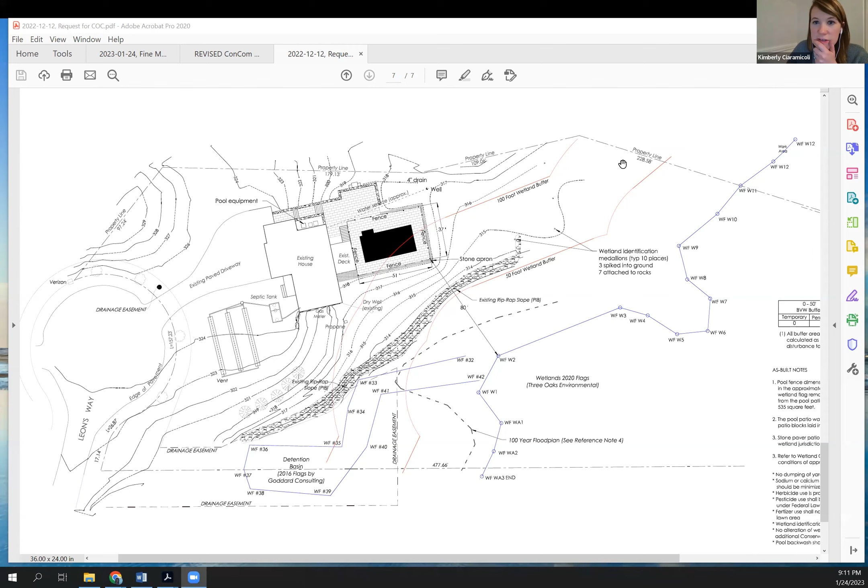The chair, yes, I believe that the commission intended for the area in the back to revegetate, and that was the reason why they were moved up. Got it. Right, through, okay.

Through the chair, this is Ari. Yes, there was an order of conditions on this property when it was built in 2021 that was previously approved with this PIB without any medallions whatsoever. So to now put a condition that these medallions have to be installed in such a manner is a bit of an overstretch when it was previously approved last year without any medallions whatsoever.

I don't think it was ever approved without any medallions whatsoever. When we approved this most recent work, there was a request to put those in. It was something that I offered that wasn't specified how they were going to be put on or affixed, but

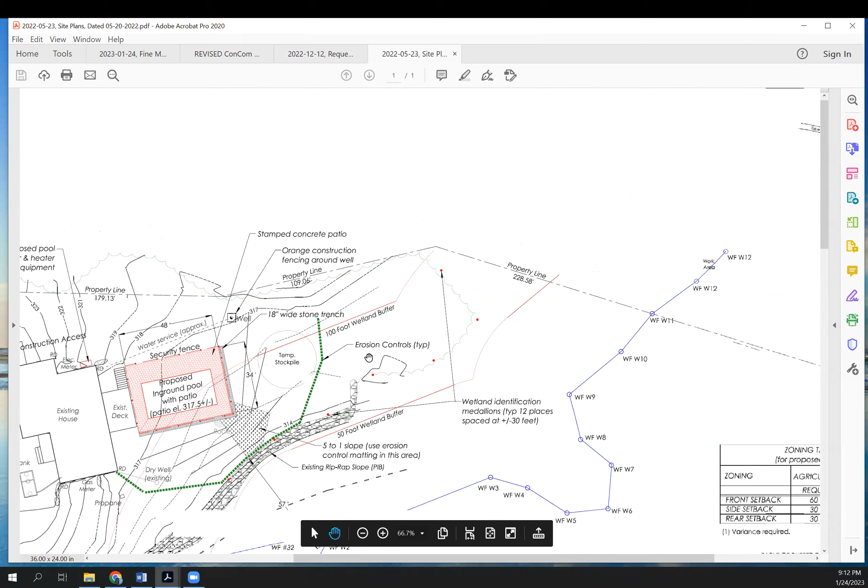I think you can see where the issue is, though. I mean, they're flush with the ground, and that area is supposed to revegetate. So once it starts revegetating and the grass grows, you're not going to be able to see them. So I think we would just request that a stake be put in the ground there, a post, and then the medallion be affixed to the post at those locations. I don't think that's a big ask.

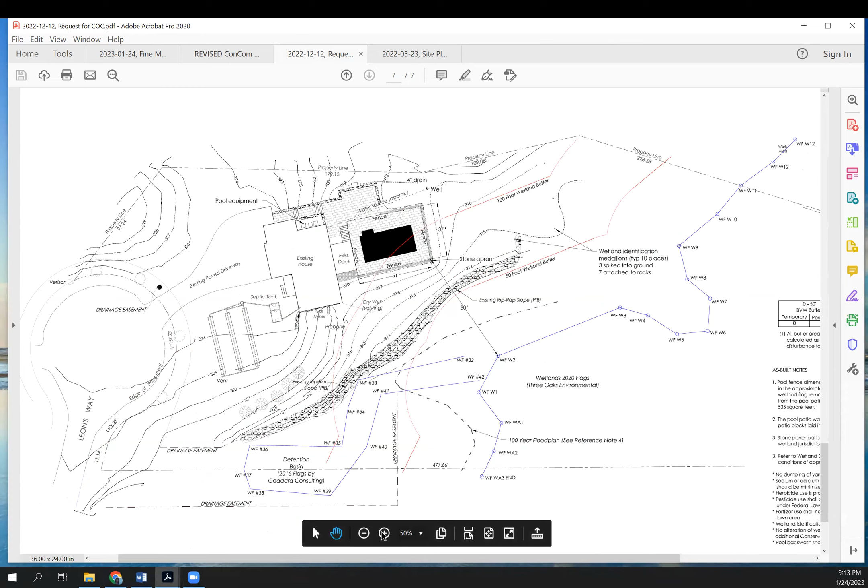I think where they were actually placed, if you look at the riprap wall, they were placed just to the north. Yeah, right in that area there, correct. So that will be, yeah, I think that's a little more accurate. It's in an area inside where the grass is going to be clipped.

Is there a photo that's zoomed out showing where the vegetation is growing naturally? So I think we're okay with the locations there. But what we're asking is that they be put on a post at those locations rather than be set on the ground. Okay. Well, the location where they are now, that it's set on the, yeah, right there, like that's a good photo. If to the right, or I guess it would be kind of northeast.

This whole area is going to continue to be mowed. They're not being placed within where it's going to grow natural. This is not a growing natural area. This was undisturbed during all of construction.

This is Dan McIntyre. Yes, I think the question is, can we shift these back on a post near the tree line rather than in the lawn? Where they were on the original approved plan?

Through the chair, yes, Kim. I know that this was discussed extensively during the original permitting process. If I had a little bit of time, I know I can pull up what the commission just decided. Why don't we table it till the next meeting, Kim, so we can do a little bit of research on what exactly it was we were looking for, rather than speculating or guessing.

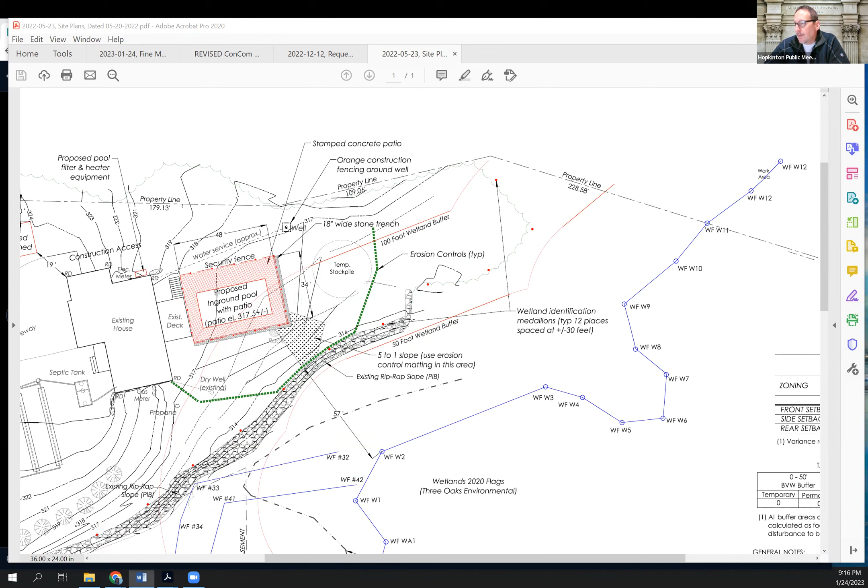Okay, 234 Hayden Rowe. This is a request for a tree removal. Kim? Yeah. Bear with me for a second.

So this is 234 Hayden Rowe. Tonight we have both the certificate of compliance to review for the site, and also the applicant is requesting the removal of 14 trees.

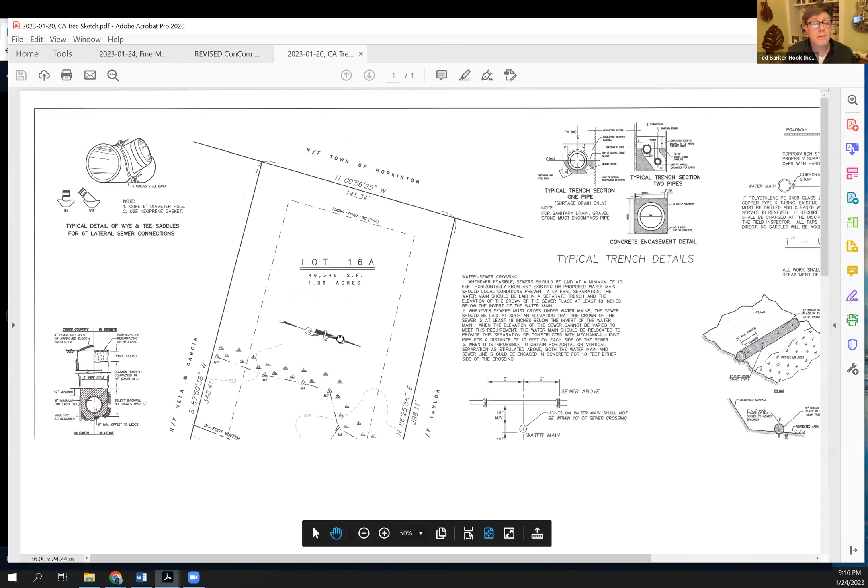I created a little sketch, and I went out last week and took a look and sketched the locations of the trees, approximate just based on eyeing it. We identified the species, the DBH, and the approximate location.

The applicant feels these trees are risk trees due to the proximity of the home. If the commission recalls, this was part of the subdivision of Hayden Rowe, where the commission evaluated cumulative buffer zone impacts, and went back and forth with the builder about the size of the home and total impacts to the buffer zone. That's why we have the house, deck, and lawn very close.

That being said, in looking at the trees, I look for basic signs of stress: is the root system compromised, is it a split trunk, are there visible branches already down, dead, or cracking, is there decay at the base. I did not see any of that in these trees, with the exception of tree number 5, a white ash, which is fully compromised by bittersweet. That one is already partially deceased and probably will come down.

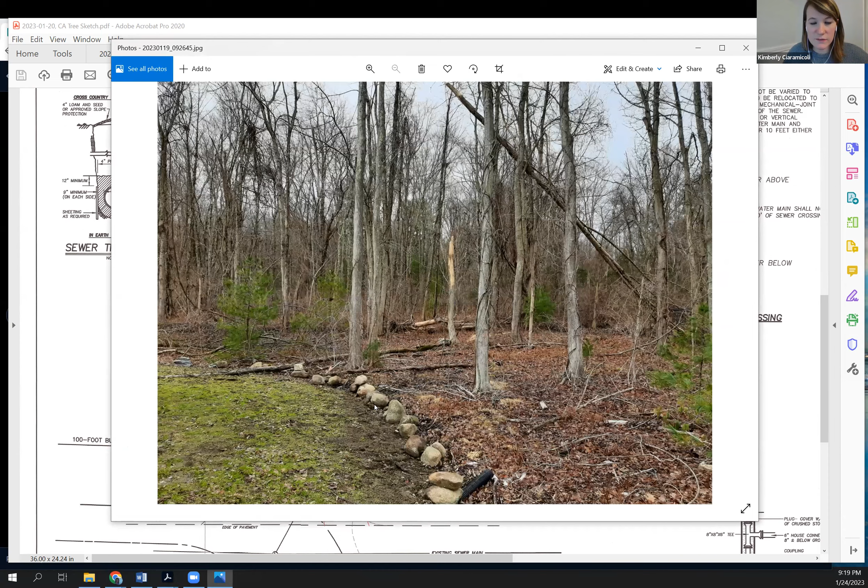So these rocks are the edge of the lawn area, and you can see the house, the lawn, and then the trees. They already had a tree fall in the last storm, a smaller DBH tree.

Yeah, if anybody has any more specific questions. I'll just open it up to the commission to get your comments and thoughts. Jeff, yes, go ahead, Jim.

Kim, you're showing a lot of photos that seem to be invasives of one form or another climbing all these trees. We haven't seen this in the summer, but do a lot of them look like they're not necessarily dead, but beyond saving because of the invasives? And then the other question is, what is the request exactly? Is the applicant requesting approval for these trees in conjunction with a certificate of compliance? Or if so, why isn't the applicant doing it the normal way, requesting trees?

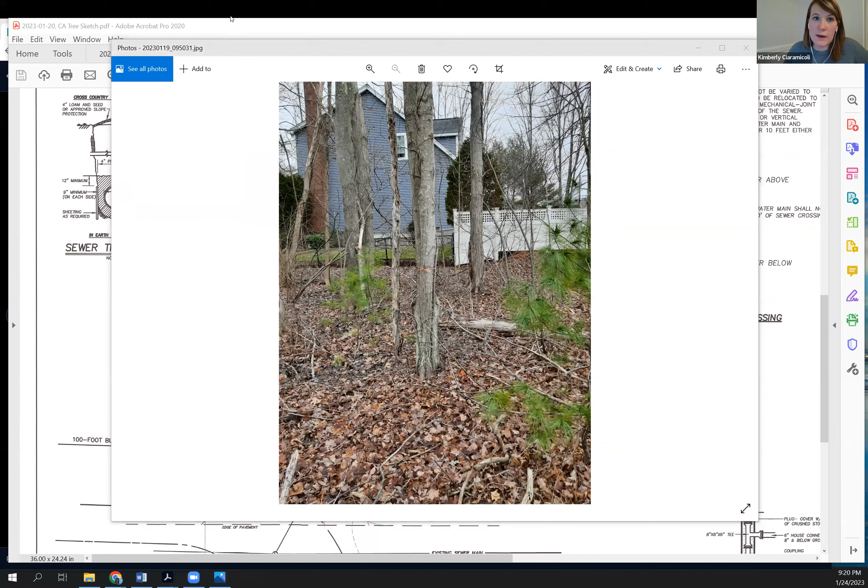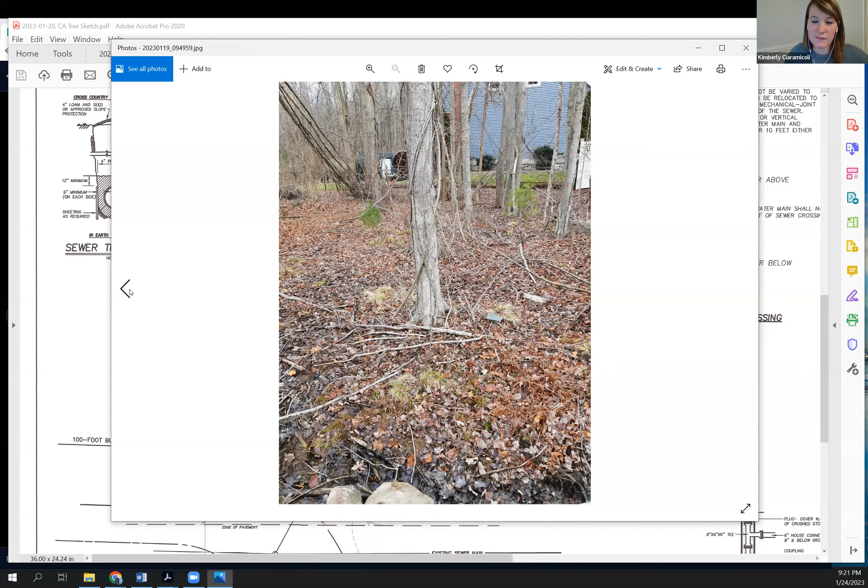Thank you, good question Jim. So first, in regards to all the vines you're seeing, there is a lot of poison ivy out there on that site. A lot of the vines you're seeing is actually poison ivy. Some of the vines are bittersweet. If left unmanaged, there will be a bittersweet problem and all of the trees will be swallowed by bittersweet. It's probably 60-40 out there, 60 poison ivy, 40 bittersweet.

In regards to the methodology, the COC request and the tree request are separate. The applicant is making the tree request because he feels all of these trees are risk trees, and he would like to move through the exemption process we can do for risk trees. But I elevated it to the commission because I felt it was beyond my regulatory scope to approve 14 trees administratively. Thank you, I see now that they're two separate items. Thanks, Kim.

All right, other questions, comments? Wait, hold on Jeff. I think I see there are two items, but they have the same file number. Yeah, it's the same site. I get that, so we have to act on the tree removal before we could ever act on the COC. And then wouldn't we want, if we decided to allow some tree removal, to wait for the COC until that's done? It doesn't seem like we'd issue a COC until whatever they're asking for is done.

Through the chair, yes go ahead Anna. I know historically when we've brought tree removal requests to the commission, if there was an associated file number, the commission could reference back similar plans, that's what we've used. So it may have just been how administratively we listed it on the agenda, but typically if we have a previous file, we try to reference the file number for the commission's resource. Right, yep, thank you Anna.

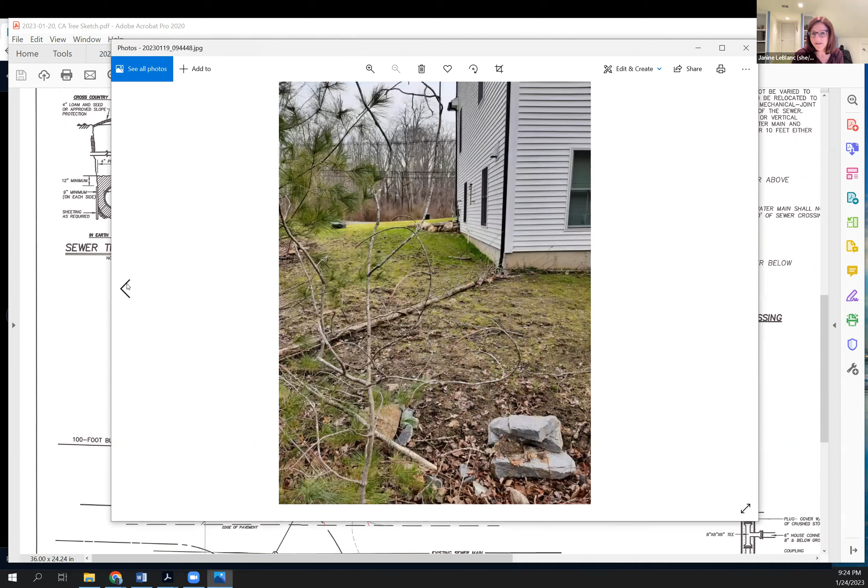To the chair, yes. I guess just an observation, looking at the pictures, this sort of seems like typical wetland conditions that you're going to get if you build next to a wetland. So is this any more compromised or a concern than any other area of a wetland?

Yeah, I think that's kind of what you get when you build next to a wetland. I think the concern is the trees, because they have shallow root systems since they're in the wetland, so there's potential for the trees to fall on the house, and there could be liability associated with that. Having said that, we raised this question when the original builder put the house in, and we told them there's not going to be very much yard, you're going to be very close to the wetland system, maybe you should think about making the house smaller. He didn't want to do that.

So now here we are in the position where the homeowner has bought the house, the builder/developer is gone, and they're looking at trees on the property that they want to have removed because there may or may not be a liability associated with them. So maybe the way to go here, since there's only one dead tree based on your observation, is to have an arborist weigh in on the structural integrity of the trees and the root system.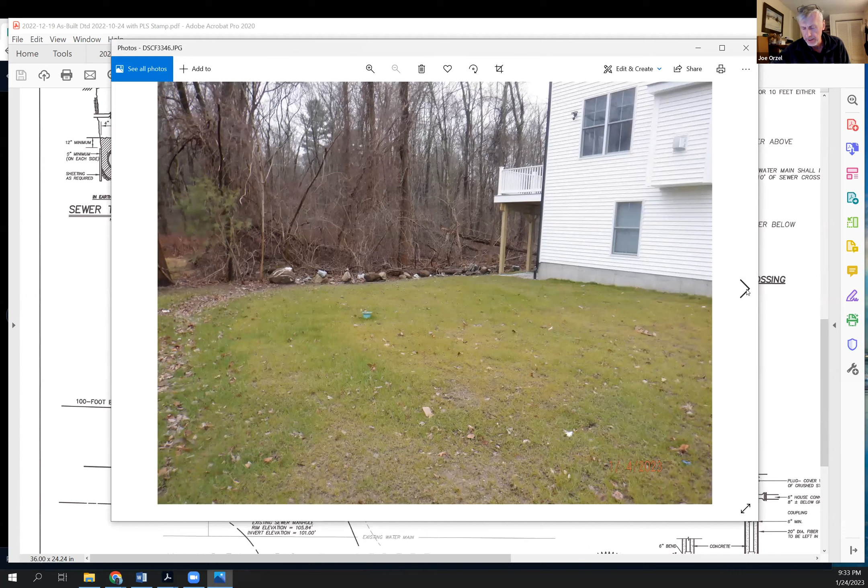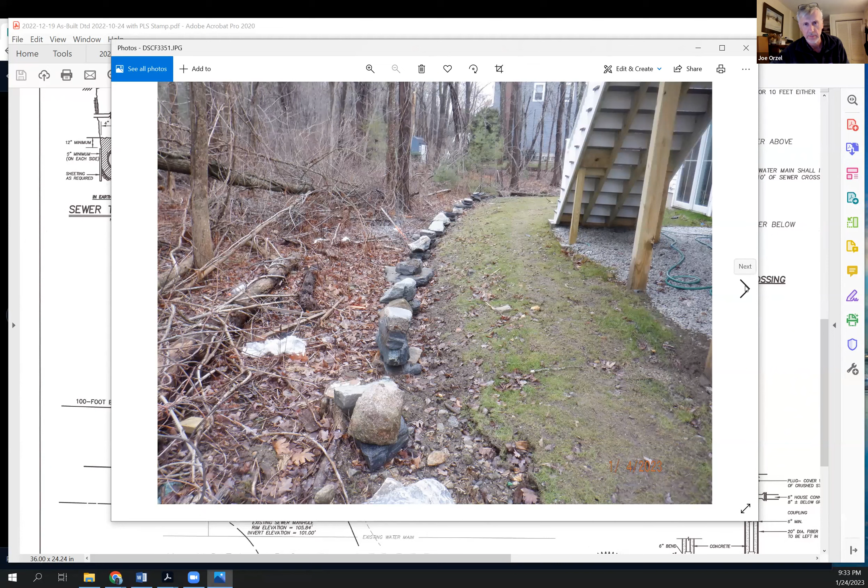Most of the site is pretty well stabilized. There are some areas along the stone wall at the back where there's still some fairly bare soil, but didn't see any significant erosion. There's a line of rocks that the photo shows well, that could function as a PIB, but there are no PIB markers. There was apparently an approved plan for a fence along the PIB or along the limit of work, which was not installed at the time I looked at it.

Didn't see any disturbance beyond that stone wall, beyond the limit of work. However, there are some areas where there's some trash and construction debris that could be picked up just beyond the stone wall. There's also that black plastic pipe, not sure where that's coming from. All roof runoff was supposed to be directed to infiltration, so I'm not sure what that is. Maybe the applicant can explain that.

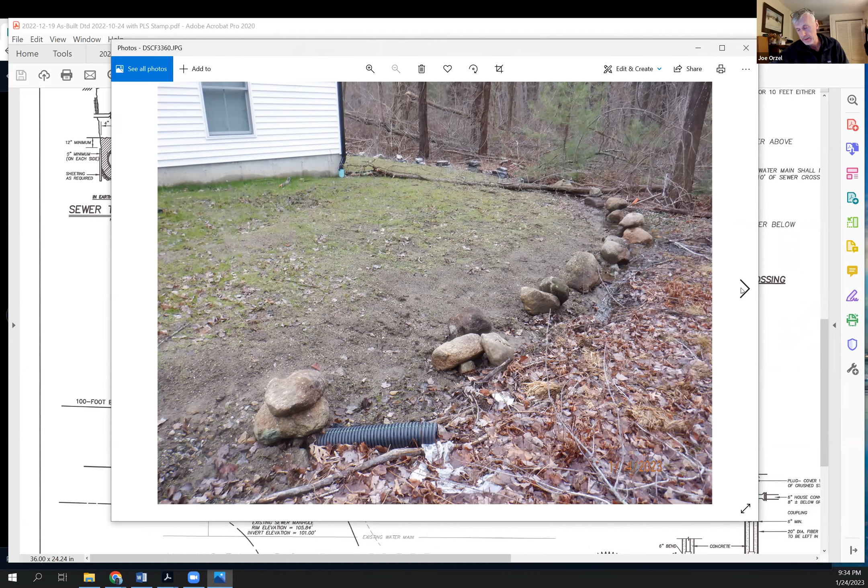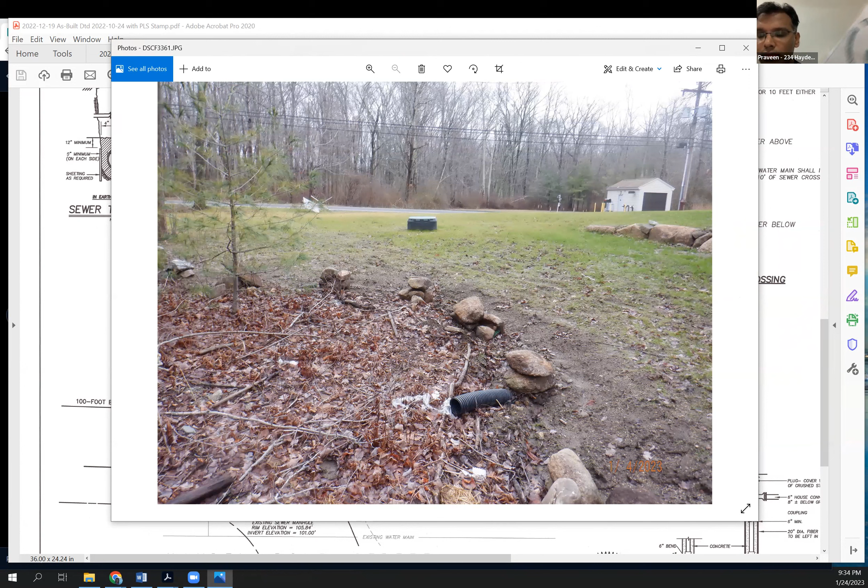As I said, there were no notes, no PIB label on the site plan. Was that requested, were PIB medallions requested in the original submittal, Joe? Yes, condition number 60 was for PIBs. So we can post it as soon as possible. I would have the builder do that since it's his responsibility.

Okay, and then he's gonna need to put posts up. Doesn't look like there are any trees along that PIB, it's just rocks. So he's gonna need to put posts up at, what interval do we look for, Kim? Every 50 feet? Typically about 30 to 40, every 30 to 40 feet, yeah.

So was there a reason there's not a post rail fence as was indicated on the plan? So let me tell you, the initial builder offered a post and rail. We had to make some changes in the interior of the house. And then later on, the builder, we came into an agreement that we'll do the fence later on our own, and the builder would not do that.

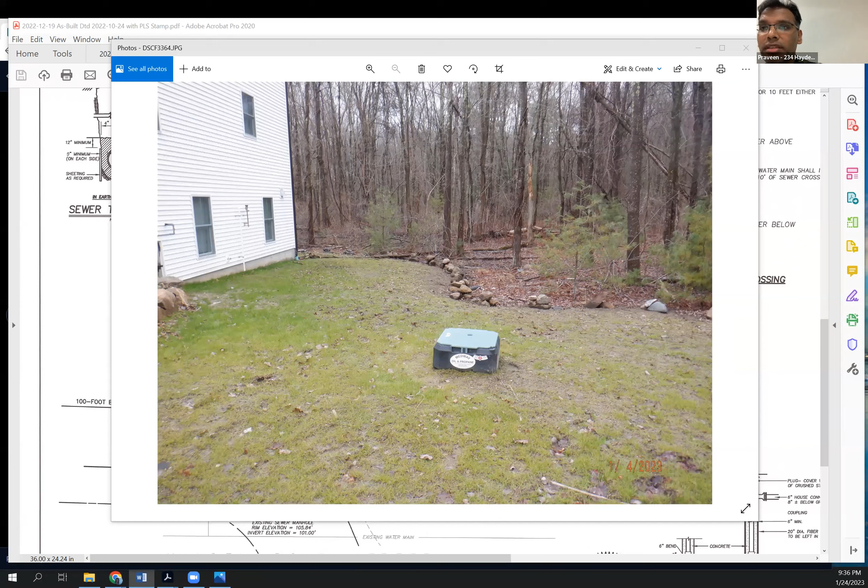That's where we stand, and this was not the right time for us to do the fence as well. You could see how the tree fell — if we had installed a fence, it would have been damaged immediately. So that's a good thing that we did not do, and maybe in the future we will, but we couldn't do it now. So I asked what the other alternative would be, and she said rocks, so I hired a contractor to place rocks.

All right, so I think we just need to reinforce that barrier — if they're not going to put the fence in, we need to put the posts in with the medallion every 30 or 40 feet, as Kim had indicated. And again, it's the builder's responsibility to do that, in my view, not yours.

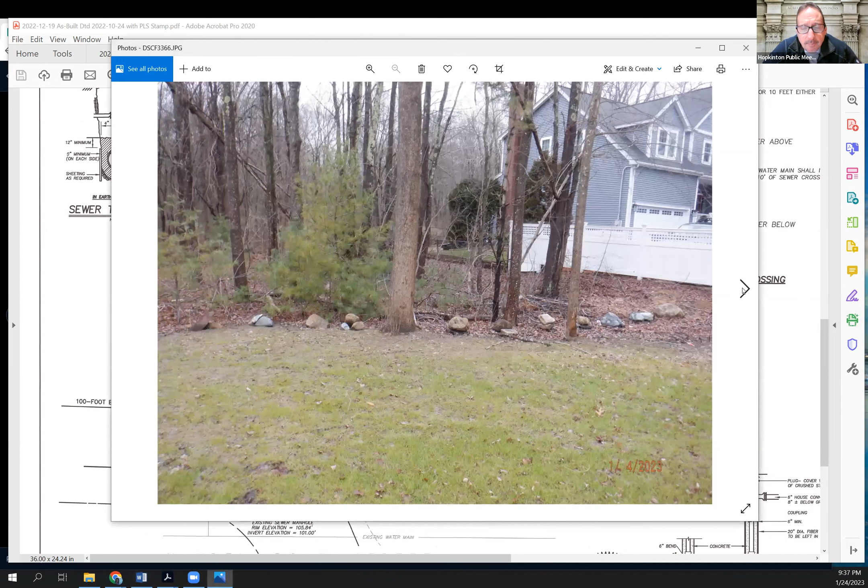And then I think the other big one was that outlet pipe on the corner — what exactly is that, where is it coming from? So I asked the builder, it's not a roof runoff, it's basically what's called a French drain. There's no water that's going to come from it. I think out of habit the contractor placed it, and it goes somewhere to the foundation, I guess, and it can be pulled off or cut off. He said there's no use for it, so there's no water that's ever going to come from that.

So is that on the as-built plan, Kim? Do you know? Through the chair — I don't believe it is. Okay, thanks, Joe. I think that at a minimum needs to be shown on the as-built.

And where it's going underground — if it's a French drain around the house that's discharging out to that area, whatever it is, I don't know, but I think we need to identify that, or the contractor needs to. So I guess the point is there's a couple more things that need to be taken care of before the COC can be closed out, sir.

So you want me to have the contractor put the French drain on the as-built plan, is that right? Yep. Or if you're able to just cut that out, is that enough for you? If the contractor says just remove it — well, if it's there, he must have put it there for a reason, so we just need to understand that and show it on the plan.

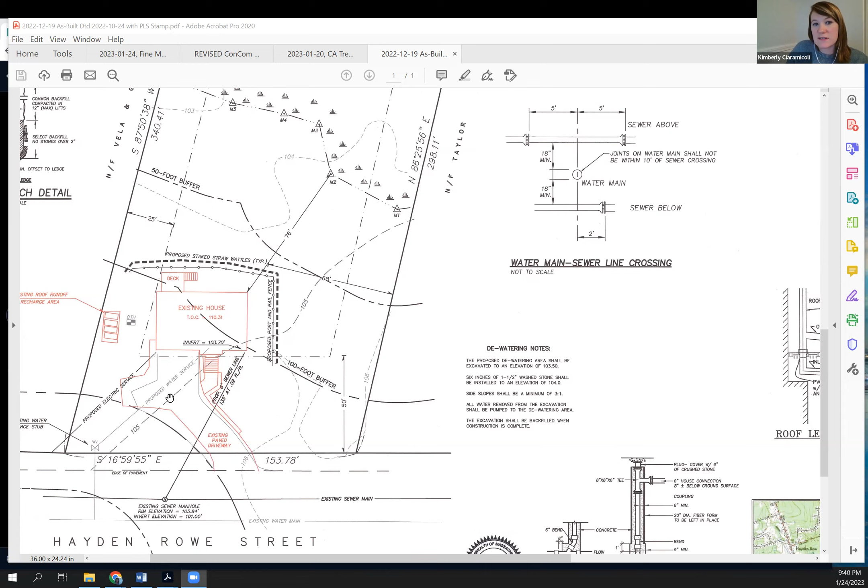But Jim's point is valid — typically we require the engineer or PLS who stamps the as-built plans to write a sentence describing the deviations, which hasn't really occurred here. There are some other site deviations too, like a slight change in the configuration of the driveway. So it would be nice, I think, to make it clear for future generations that there ought to be something to explain that or show it. Yep, that makes sense, Jim.

Okay, so a little bit more work needs to be done to close out the COC. I guess for the tree removal, does the commission agree that we should have an arborist take a look at that and evaluate the integrity of those trees, and come back to us with a report? Does that make sense to everyone? Yes, makes sense, Jim? Yep.

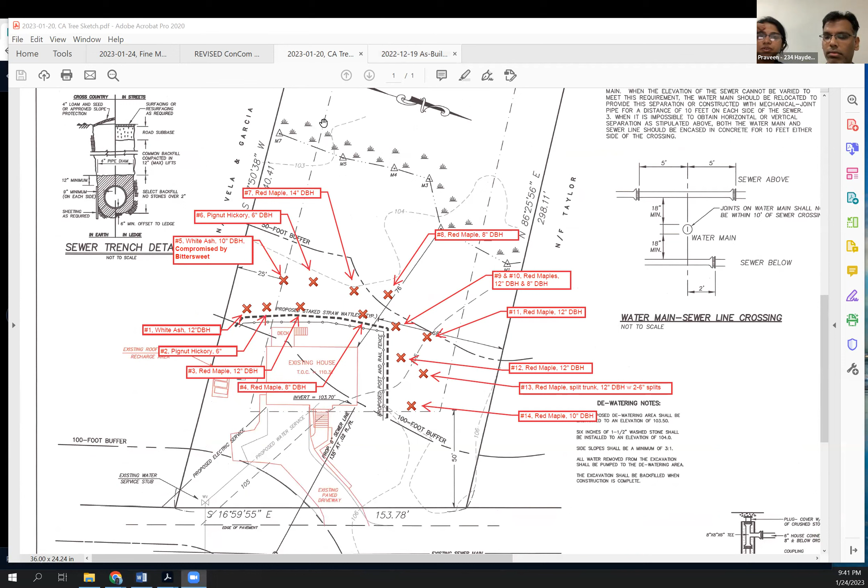Hello, I'm Praveen's wife. I just wanted to ask, there was this poison ivy that fell on our roof. It's down now, so what can we do about it? Because we have kids and they're going to play out and there's poison ivy right in the backyard. So what's the best way to go ahead? Like Kim mentioned, don't step on that. I didn't even know it was poison ivy that fell off.

I would just put some gloves on and take it back into the woods and throw it back there. It's like a 50-foot tree wrapped with poison ivy. If you have to cut it into sections, you could do that with a bow saw. Not sure what else to tell you. Well, you could hire someone to do it. I wouldn't recommend that, it's pretty easy to cut it yourself and just throw it back there. But definitely wear gloves and don't touch it.

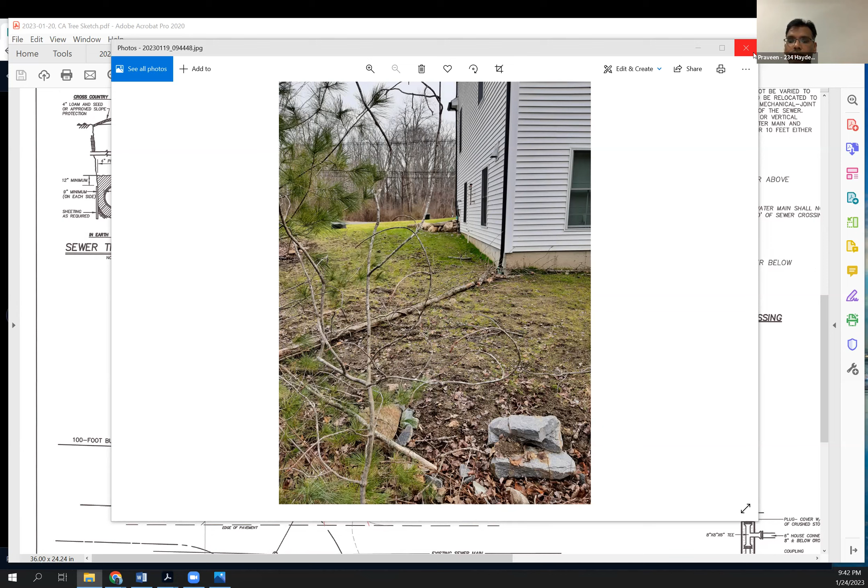This is the problem on the backside. If you leave trees that can fall on the roof or cause damage to somebody - and if Kim can show the other picture where it was going toward Mr. Taylor's house, it was almost able to fall anytime onto his property. That's what happened. So if we don't take action, this will happen. Like we said, if we can get an arborist to just take a look at those.

Can we show pictures of the posts with the medallion, and have the site plan emailed to you, and that should be enough? Or do we have to meet again for the COC? Those are the two things pending. I think as long as it addresses all the items we just discussed for the COC, you don't need to show up for the meeting. If they're on the plan and it looks good, we can just vote as a commission, and you don't need to be present. Okay, perfect.

I just want to clarify for the applicant's benefit that a quote from a tree removal contractor is not the same as an evaluation from a certified arborist. You want to look for that certified arborist title with the stamp and the license number. Okay, that's great clarification. Thank you, Kim. Good point, Kim.

Okay, any other questions on this? All right, thank you for working with us on this, sir. We appreciate it. Okay, bye, have a good evening. You too.

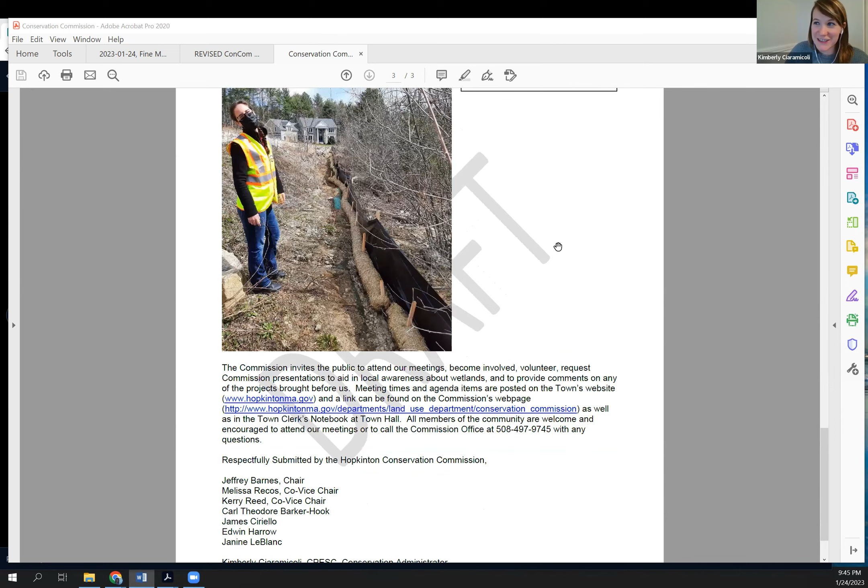By the way, I think TCMC is Tick Muck. Okay, I think I need a haircut. I was gonna say, look at this great photo of us I got to put in the report this year. We were not forewarned that photo was gonna be taken. No time for a haircut there, Ed. Kerry always misses the good meetings. Yeah, and we're also very thankful that Anna didn't give anybody COVID at that meeting. Right, because you got it right after that, right? I did, yeah, I remember that.

Okay, all right Kim, any public forum requests? None. All right, I think we're good then, unless you guys have anything else.